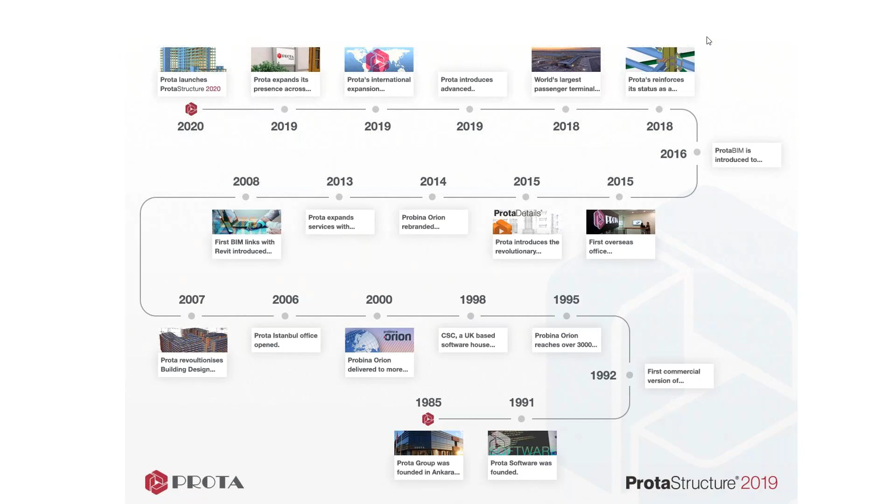And what we want to emphasize over here is that the Prota Group is not just a software development group, but it also has a very strong background in engineering projects. So we're not just developing software without really using the software ourselves. And so being a first-hand user, we know exactly what is needed by the engineers, and so that's what we produce.

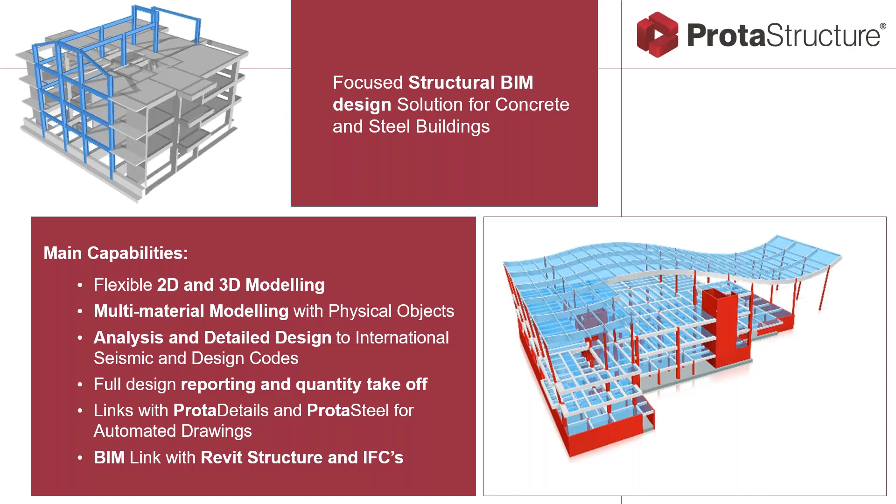So you don't need to go to separate programs to model your concrete and then a different program to model your steel. It's all done within ProtaStructure, and it's a full analysis and detailed design package, full design reporting and quantity takeoff. It has links to Prota Details and ProtaSteel. ProtaSteel is the software which we will be talking about today, and then BIM links with Revit Structure and IFCs.

So that's ProtaStructure. And the main benefits, why would you use ProtaStructure? It's the ease of use and maximum productivity. I mean, obviously, in the times we're living in, there's a glut of software, and every software claims to do everything, and they do most of the time.

But the question is, how do they do it? How much time do you need to spend to get a certain thing done? And if the difference between one software and another is a lot, then obviously that's what makes the difference, because this is man hours. So our main emphasis is on maximum productivity and ease of use. That's what makes it a much better product than its competitors.

ProtaSteel is, like I said, what we'll be talking about today. It's automated connection design and steel detailing of your projects. It's totally integrated with ProtaStructure. We'll be talking about some of the main features like Intelli-Connect, some of the design reports and the wide range of connections, etc. Obviously, in a seminar like this, it's impossible to go over all the features. All we want to do is get you excited about the main capabilities of the program, so that you can see what you can do with it and take it from there.

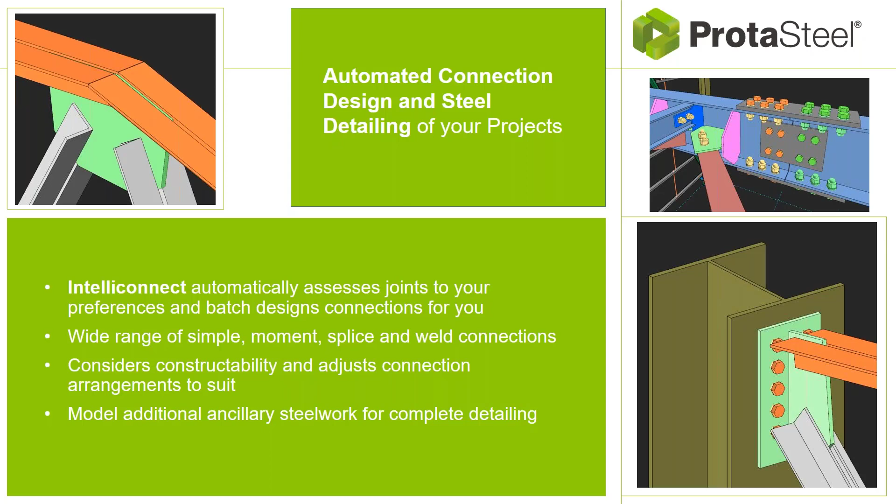So ProtaSteel, today's webinar, what do we mean by connection design and steelwork detailing? What we mean is the full transfer of your ProtaStructure model to ProtaSteel, including all your analysis results. So once you're done with the model, you will not have to remodel the structure in ProtaSteel again. You will just transfer the model, including the analysis results, into ProtaSteel and start doing the detailing. It's integrated intelligent connection design using a comprehensive range of flexible connection macros. We'll be talking about those in a minute.

Automated steel connection design using our revolutionary Intelli-Connect to instantly create constructable arrangements. We'll be talking a lot about this. You'll see it's a fascinating feature. It's one of the features which no other software has at the moment.

Full connection design reporting with step-by-step calculation documentation. We'll be talking about this as well, and you will see that this is a feature which is normally a separate program. None of the programs offering this kind of capability offer full connection design reporting built into the program itself. Usually these programs are sold separately. I'll be talking about that part, but what you need to know is that it's entirely integrated, and there's a lot in it.

Creation of complete steel detail drawings to quickly deliver your projects. These are for the consultancy companies who need to prepare the connection drawings, local details of particular points which are important to pass over to those who are going to produce the shop drawings. We'll be going over those as well. And finally, extending your steel detailing capabilities down to shop drawing production, assembly details, and even full cutting lists. This is for the full-blown user who wants to actually produce shop drawings for the fabricators. So there's a lot to cover, and hopefully we'll go through the main features. So let's see it in action.

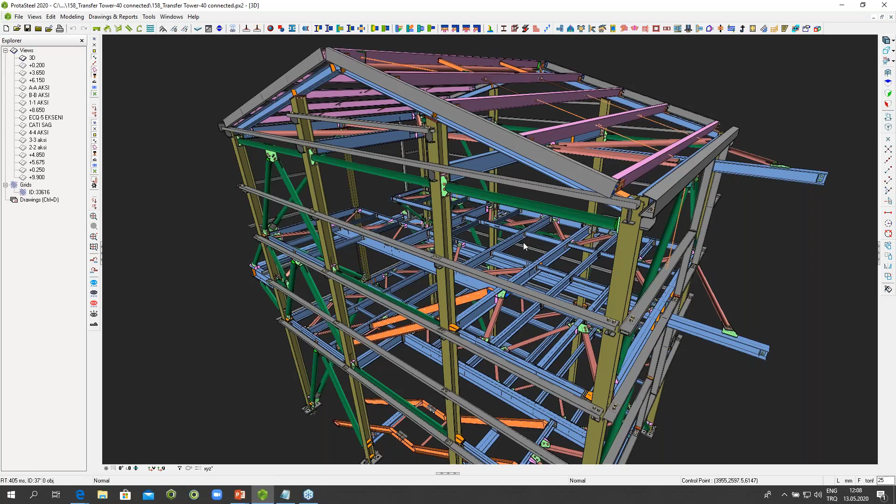So like I said, what is ProtaSteel? ProtaSteel is a steel detailing solution. As you can see on the screen, you have a little view of a detailed model, and I can zoom in to see what it is like. All the bolts, all the plates, all the welds, all the elements, all the cuts have been modeled directly in. So the purpose of the program is to leave nothing unmodeled, to take the model from ProtaStructure to ProtaSteel, and then model all the connections in ProtaSteel.

And then once you have the model connected, you can create your shop drawings from there. You can create your connection drawings from there. You can take material takeoffs, etc. So that's what we'll be talking about today. So let me begin by opening the model on which I'm going to show you most of the features.

Okay, so the program is all about detailing. The program is all about connecting. So obviously we need connection macros. We need fast methods to connect the steel. So let's begin with some of the simpler connections. We've got a range of connections over here, you can see on the top of the screen. These are all the connections which are available.

And don't be misled into thinking that there are not so many, because in ProtaSteel, most of these connections are multi-faceted, and they can handle multiple situations, as I'll show you in a minute. For example, if I were to talk about the purlin connection, you can see there are different types of connections which are all built into the same connection.

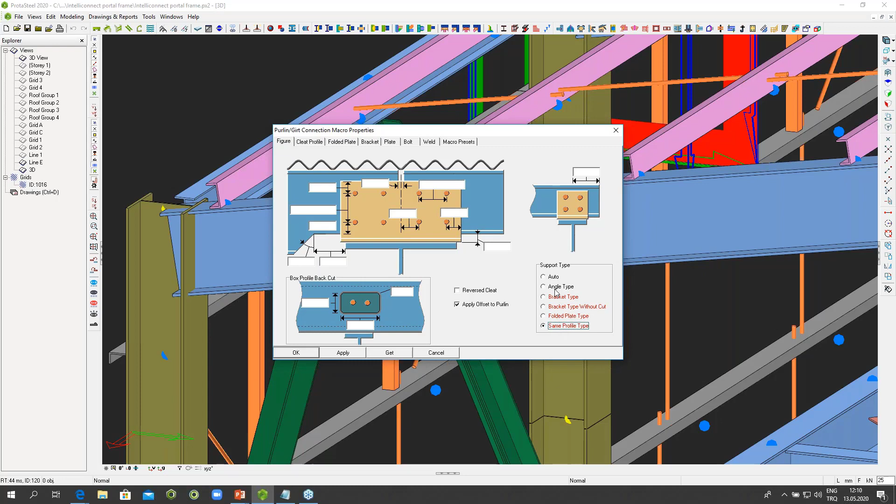So I'm going to choose the angle type with the reverse cleat over here right now. And I'm just going to show you. All you need to do is just pick the main beam and pick the purlin, and there you have the connection. It's as simple as that. There's nothing else you need to do, basically click the elements which are related, and there you go. Your connection is ready. It's as simple as that.

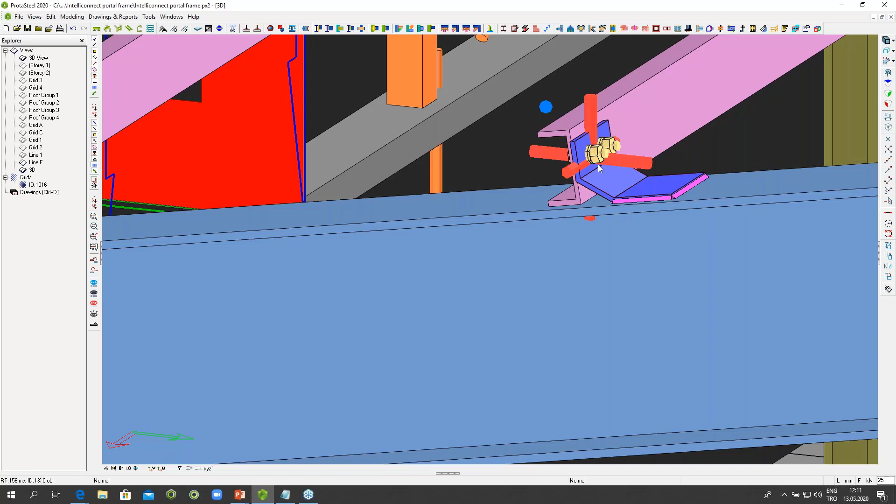And as you can see, as I just showed you a while ago, the options you have are many. You can change the type of the connection right from within the macro. You can go to a completely different connection, and normally programs would have all these features as different icons. So all these, the angle type, the bracket type without cut, the folded plate type, all these would be different icons, but that'll just create a clutter on the screen. But over here, what we have is you can just connect it as you go.

I'm going to talk about over here on the left. Let me just go over the list of macros first. So you have beam to beam connections. You have beam to column connections. You have the stiffened end plate connection. You have the beam to beam connection. You have a fin plate connection. You have the angle cleat connection. This is for the fixed beam. You have the beam to column stiffened end plate connections, beam to column end plate connections.

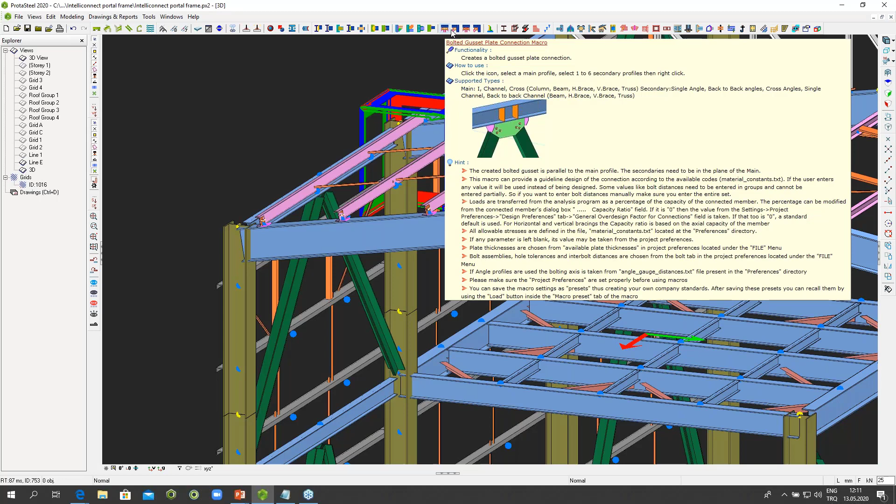You have the moment connections over there, the haunch connection, the directly welded connections, the flange plate moment connection, which is very commonly used, and you have the extended end plate connection, and then you have all your bracing connections for the vertical braces and the horizontal braces and the trusses, and you have the welded gusset connections and the welded corner gusset connections. Then you have connections for the purlins and the splices, and there's a whole lot which we can talk about, but let me just quickly take you through some of them over here.

So for example, if we were talking about the girt connection over here, let me go back to this particular connection and change the type and use the bracket type without cut, which is more appropriate for the girts, and just show the column, show this girt, show the other girt, and that's it. Reverse this. I don't want to make it hang from the top, so I'll use the reverse cleat option, and there you go. So as you can see, with a few clicks, I'm able to model my connection.

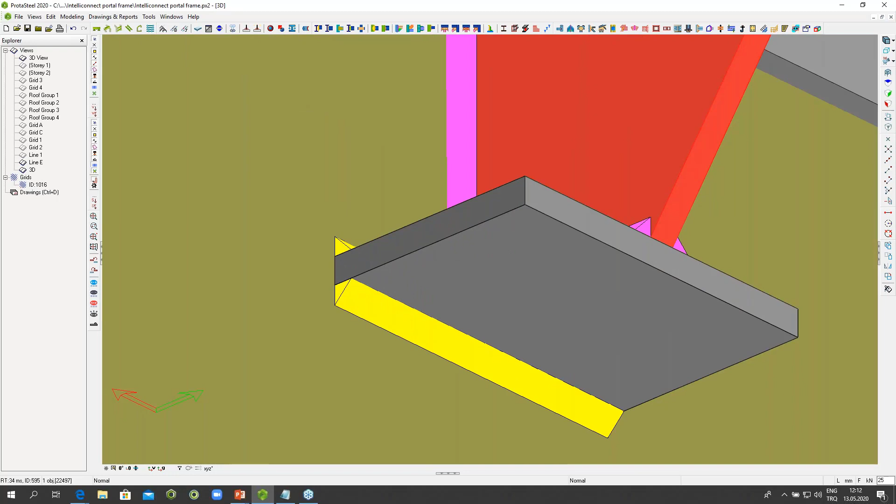Previously, we didn't have the welds in 3D. As you can see now, we have the welds in 3D, so it's easier to see your welds, and that makes it a lot easier to visualize them. In a similar way, you can continue connecting. For example, this point over here can also be connected with the same one. So whether there are two girts coming in or a single girt coming in, the same macro will be used to model it.

Now let's go over the splice. Obviously, every model is going to have areas which you will need to splice. So let's just go over that. Just by a few clicks, you are able to splice the connection. Let's go over some other columns. It's as easy as clicking. And I'm going to show you an even easier way in a while, but for the moment, you can see on the screen that it's extremely easy to connect.

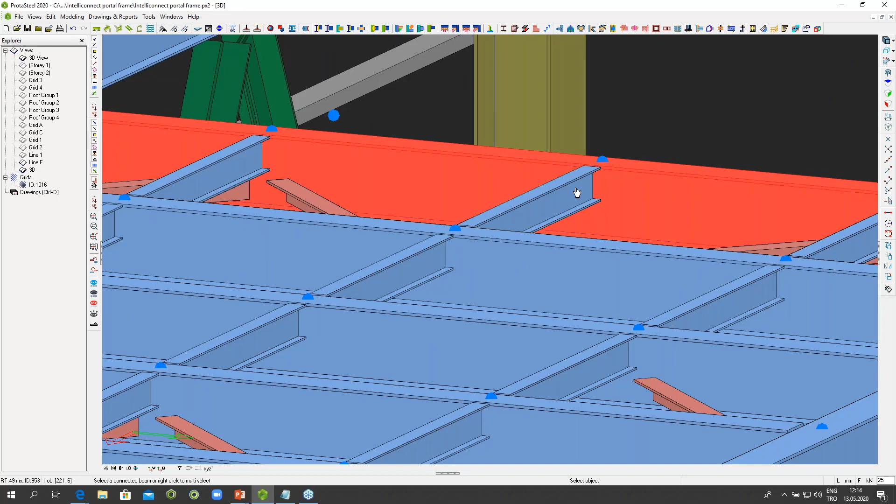Now, let's talk a bit about the floor. It's one of the major parts of the connections. We have large floors in our buildings, and these floors can be connected in different ways. We have different options. For example, we can have a stiffened end plate connection. So I can just go and connect this main beam and this secondary beam, and there we have a stiffened end plate connection. It's a very commonly used connection. It's one of the best connections as far as ease of erection is concerned. It's slightly eccentric, but it's also very useful for other reasons.

Then we have the beam-to-beam end plate connection. So for example, if we have this beam and this beam, we can have an end plate connection, which is different from a stiffened end plate. Or what we can do is we can have a fin plate connection. We can have a connection like this. So all these are options which we can use in our floors, and obviously all of them have their own merits, and depending on what we want to do, we can use them very easily. What I want to say over here is that all these connections are being designed as we go.

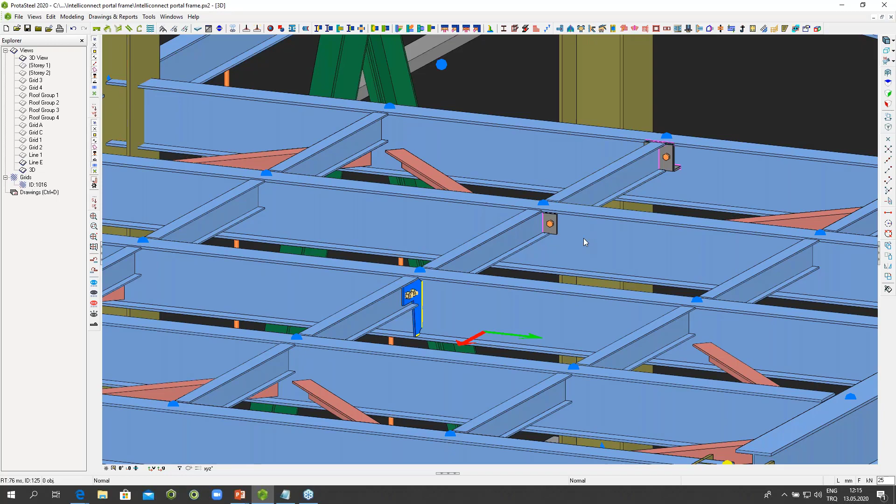So that's one of the most important features which we'll be talking about in a while, but I just want to emphasize that as we go along, normally the biggest amount of time which we lose, for example, when we are connecting, is that all these macros have a lot of input, and all these numbers have to be inputted theoretically, and that's a lot of input. I mean, anybody with not too much experience in the field of steel will find this pretty overwhelming to enter that much information to get a properly designed connection.

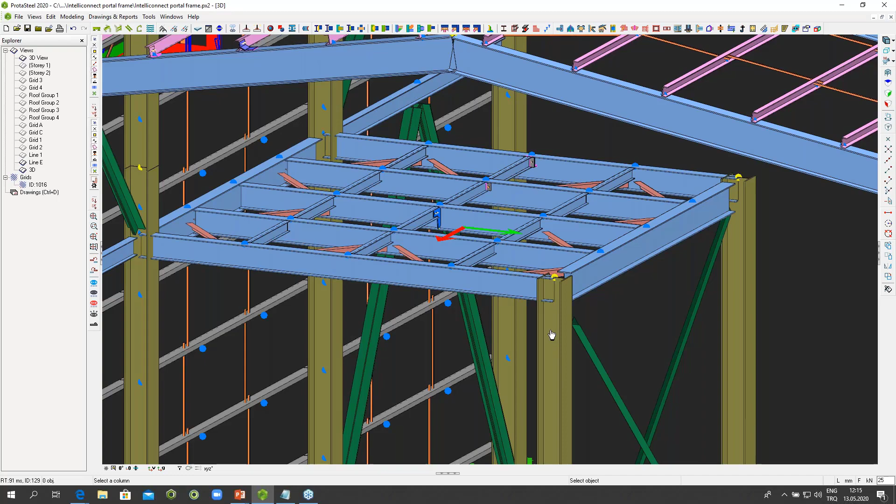But with ProtaSteel, the advantage which you will not find in other softwares is that these connections are being designed according to the loads which have been transferred from ProtaStructure. So, for example, I'll do a little complicated example over here. Let's go and connect this column with this beam, and this is a haunch connection, and it's got the top stiffener and the bottom stiffener, but I want the middle stiffener as well. So I just go inside and I go to my figure and I add the middle stiffener. So now I have the middle stiffener as well.

Now I go on the other side, and on the other side I have another beam coming in, and this beam needs to be connected. But now these two stiffeners are creating a problem. They're getting in the way of the connection. So I'll show you a feature which is very useful. I just select the column, select the beam, and I say that I want to use these existing stiffeners from the other connection as part of my connection, and there you go.

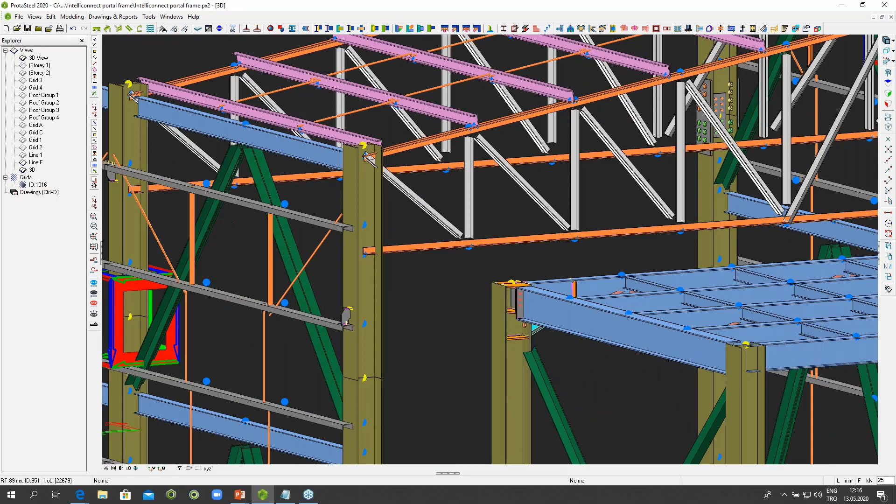So what you're seeing is a very complicated joint with a haunch on one side and a stiffened end plate connection on the other side, which have worked together, as you can see on the screen. And with a few clicks, we've been able to connect them. So I showed you the floor beams, the haunch connection, the connection from the other side. I can show you how the fin plate is connected, how the stiffened end plate is connected.

Let's do a bit of the bracings. For example, these are the vertical bracings. All you need to do is just show the beam and show this vertical bracing, and there you go. Your connection is done. Let's do a bit of the trusses, for example. Let's go over the trusses. So for the trusses, all I need to do is choose a welded gusset connection, and I need to choose the bottom chord. These are the secondary elements, and my truss is connected.

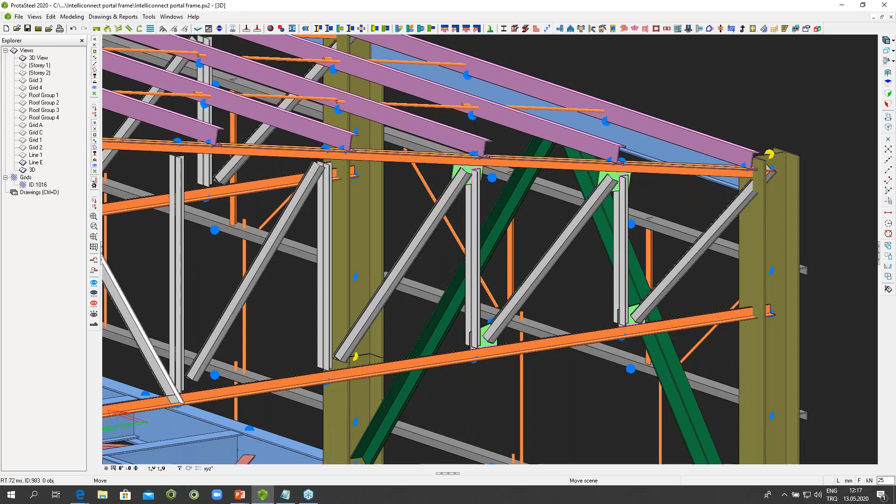This one is connected as well. This is connected as well. As you can see, I'm just clicking on the elements, and the connections are being made. What about over here or over here? If I come to this point, what I can do is I can quickly use this macro over here and connect the truss. So very quickly, as you can see on the screen, I can go about making my connections.

Let's do a bit of base plates. So for example, this is one feature I want to talk about quickly and then move on. Let's do a base plate, and it's the same macro as you will see, but there's a difference between this column and this column. And the difference is that this column has a fixed base. As you can see, all the releases have been fixed, whereas this column has a hinge. So the rotations are allowed.

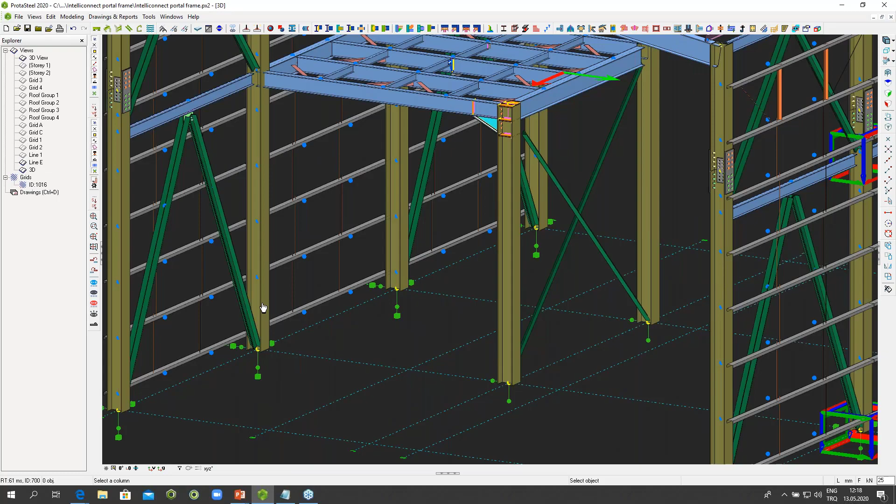The program will automatically detect this, and while I'm using the base plate on this column, it's going to produce a fixed connection. But when I use the same macro on the hinged column, it's going to produce the hinge connection depending on the end conditions of the column. So these kinds of presets, which I'm not going to be talking much about today because we don't have much time, but what you can do with ProtaSteel is you can actually create company presets for all different types of profiles, and then basically just start clicking away with these intelligent macros.

Because you'll have the company presets in the background. They will be intelligent. They will realize which profile you're talking about. They'll realize what structural condition exists, and they'll know the loads. And all you will need to do is just point and shoot. The other programs, if you actually sit down and compare, what you will see is that the majority of your time is spent on entering the data. This is no exaggeration. The majority of the time is spent on all these numbers on the screen. There's so much to input for each and every connection.

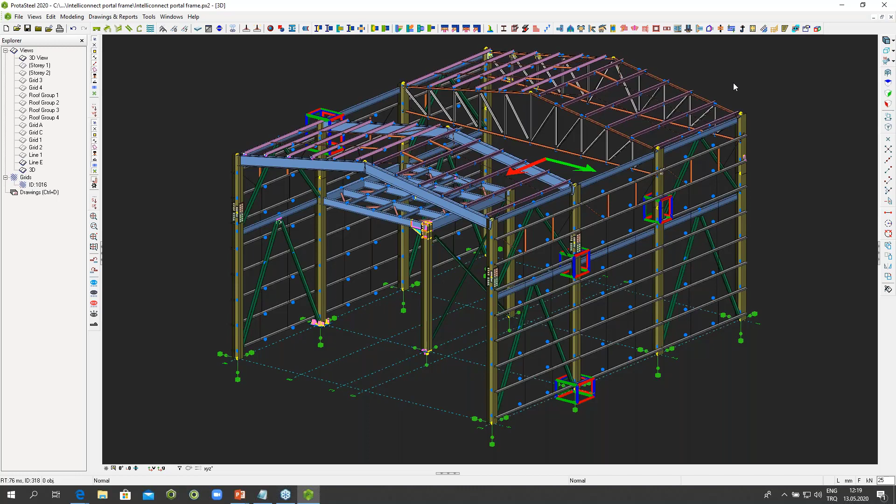So normally, even if you were well experienced, you would spend about 5 to 10 minutes entering a single connection. But once you have the loads from ProtaStructure, once you have the company standards set up, and once you have the company presets set up, it becomes extremely easy to make these connections. And of course, it's not just structural connections. Okay, let me just continue with this a bit.

So we had a base plate over here, and what you can do is you can add the anchor bolts, for example. So you can select this base plate, and you can add anchor bolts to that, and then you can double click on the anchor bolt and say I want a different angle on that, and you can turn it to whichever direction you want, and very easily you have your anchor bolts fit in.

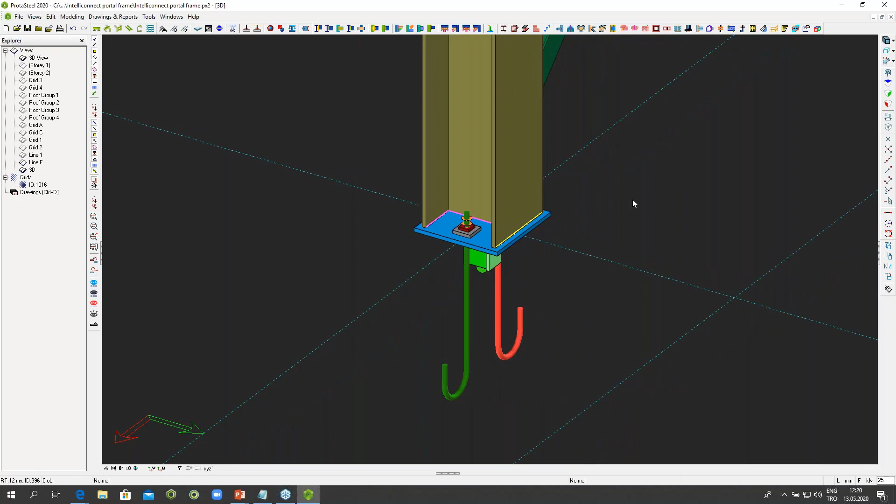Obviously, this is not the only type which is supported. You can have different types of anchor bolts, the J type, the simple type, and there's a background file which you can change to modify the different types. So those are very easy. And let me come back to the non-structural connections for a bit now, so that you can see the wide variety of things that I'm talking about.

But before I do that, let me quickly do this. So let's say we have a floor which has a concrete top on it. So we can add the studs extremely easily, as you can see. Very easily, I'm just going to add the studs. So it was as simple as that.

Now let me go ahead and add some handrails, just to give you an idea. Let me just add a handrail over there. Let me just add a handrail over here, and let me add a handrail on that beam. And once the handrails are added, you might think they're connected to each other, but they're at a distance. They shouldn't be like this.

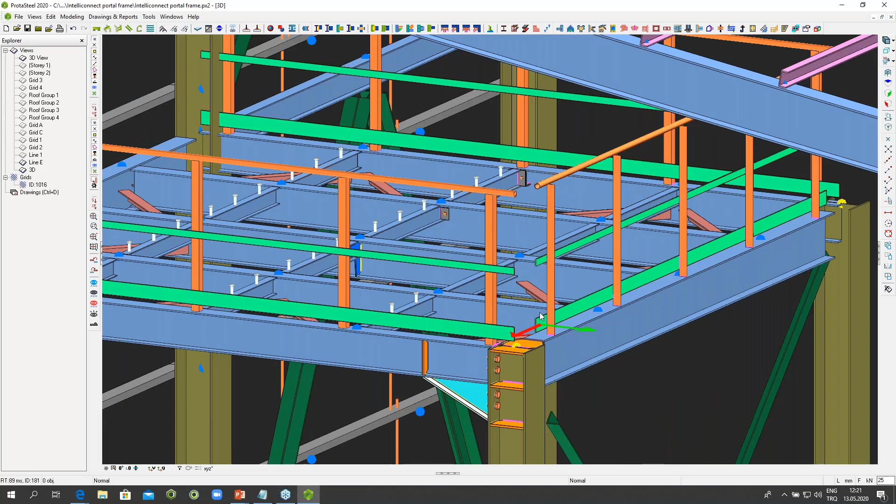So we have something where you just show that this handrail needs to be connected to this handrail, and there you go. Even the pipes are connected. The bottom, the toe plate and the knee plate, they're all connected. Let's join these two as well. I need to go to the other side to see it better.

Yeah, just go to the other side and go to my connection. And I say this handrail needs to be connected to this handrail. And there you go. So the knee rails, the knee plates, and the toe plates are all connected. So as you can see, it's not just structural connections, it's the non-structural connections as well, which can easily be modeled.

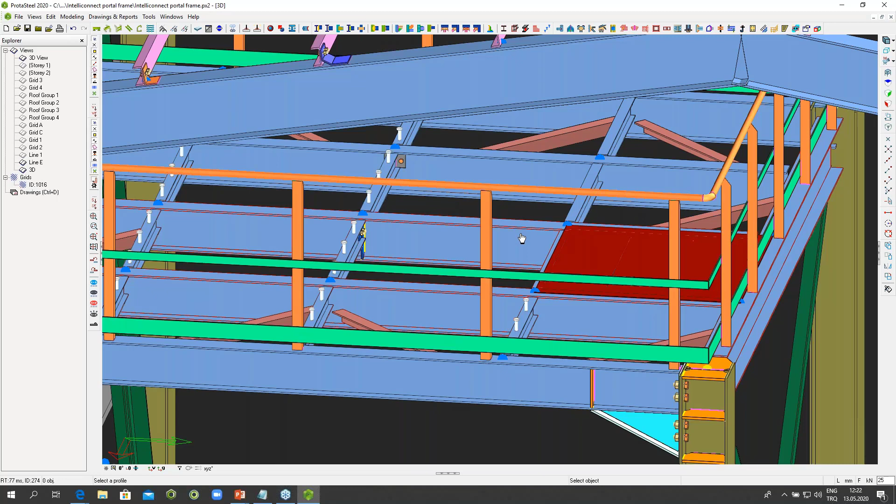What about if we had some checkered plate on this? So if I were to have a checkered plate on this, for example, if I were to select this beam, this beam, this beam, and this beam, and right click, I can immediately produce a checkered plate flooring, and that's as simple as that. I can go on and copy them around as well. So what I want to emphasize over here, not wanting to take too much time, is that these connections are extremely easy to use, and they shouldn't overwhelm you at all.

Now I want to move on to the next feature, which is the connection reports. So let me just open this model again so that I can take you through that. So what is the need? Where is the need for that? Obviously, all the consultancy companies want to connect their models, but they also want to produce the connection reports, the connection design reports, for the client for approvals.

And normally, I talked about this in the beginning as well, this takes a lot of time, and not only is it very time consuming, you have to use dedicated software for this, and those are not cheap. You have to spend thousands of dollars for each license just to get this feature of being able to produce the connection reports. Now, let me just show you, for example, over here.

Let me do a quick haunch connection over here, and let me connect this column to this beam. And what I want to show you is that there's a color coding scheme which I want to open right now. It's over here under the views menu. When you open it, everything turns white, except for the connections which have been checked.

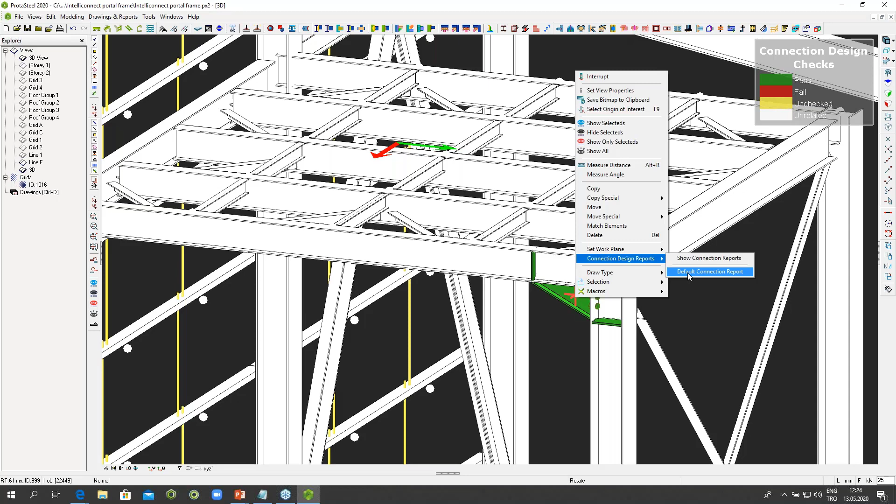And if the connection is green, what it means is that everything worked. Nothing has failed. And if the connection is not green, if it is red, that would mean that something inside the connection has failed, whether it's a bolt or a plate or a weld or whatever. But then you have to go inside the report and see. So let's go inside this report. All you need to do is select the macro and say, I want to see the default connection report in this case.

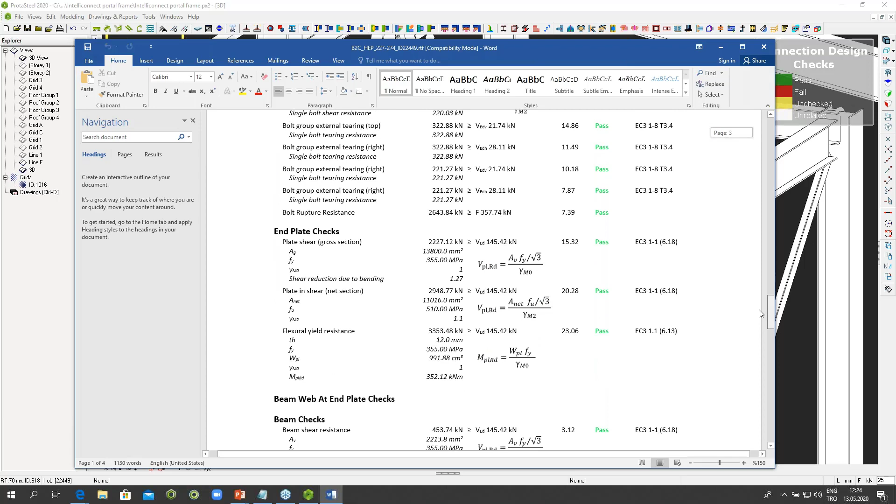And the report is ready in the background. And as you can see, this is a full-fledged report with a picture on top. It gives all the input information in the beginning, and then it starts the checks, the geometric checks in the beginning, and then actually the stress checks, and they're all passing. Nothing has failed. Green color means everything has passed. If you see something red, then something has failed. So let's make something fail.

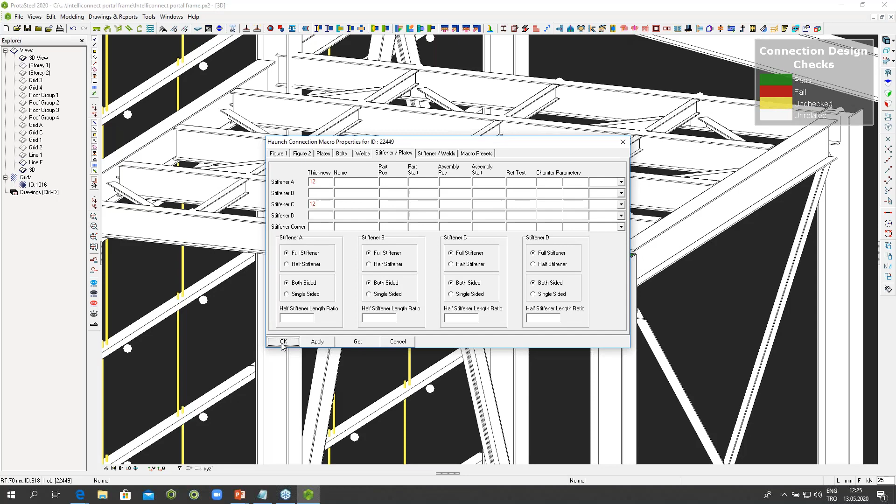For example, if I were to reduce the thickness of this, maybe that will make it red. Yeah, okay, so I reduced the thickness of the stiffener, and there's a buckling of the stiffener going on because of the heavy moment loads. And let me report now. And now when we go through the report again, we see that a lot of it is still green, but we have something failing. The intermediate stiffener has failed, and it hasn't failed by much, but it's failed.

So as you can see, it's extremely useful to just use this feature as it is, and you can visually see immediately whether the connection is green or red. You don't need to worry about the green ones. You just keep on clicking and making your connections. Whenever you see something red, you stop. And what I can tell you is that in most of the cases, if it is red, it'll be a very minor thing, because in the background we are doing a basic guideline design to begin with. So most of the major checks are usually completed before you do it.

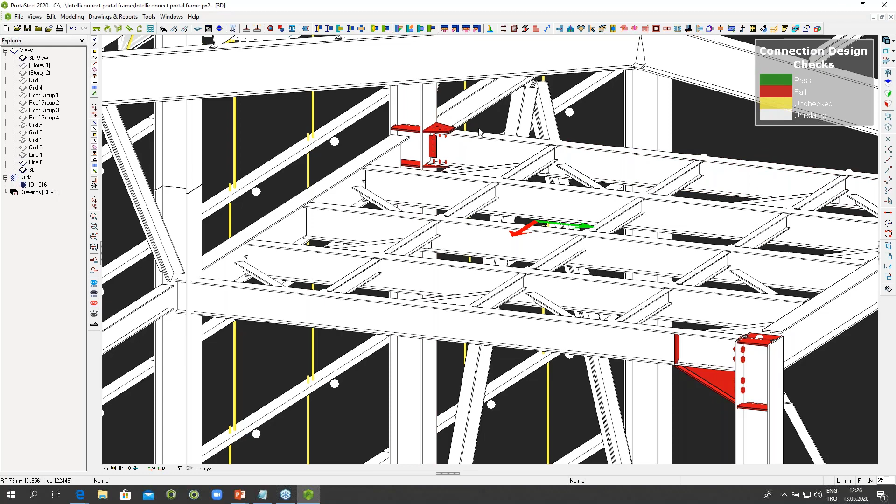So even when you see something, let me just show you a flange plate moment connection over here. Let's see if this is the one. Yeah, so let's connect this column with this beam. Yes, so that's coming out red. And let's go on the other side and see what the problem is. There we go. And once again, you will see that the major checks will all be passed, and there could be some minor failures with the stiffener sometimes. And all these can be bypassed by the company standards. By the way, you can input your company standards, and they will help you. So you see some stiffeners failing at the end.

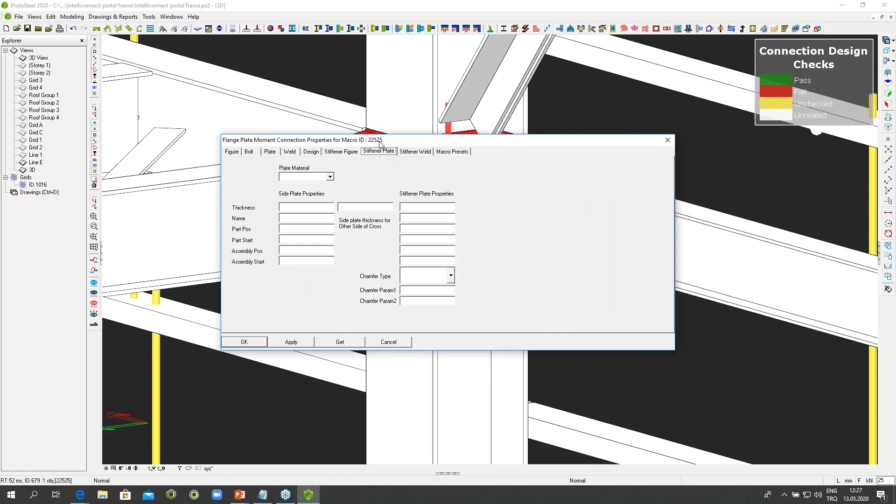So obviously this has a pretty simple solution in all probability. Let me just go to that. Go back to the macro. And I think it could be this one. I'm not sure, but let's see. Yeah, so I increased the stiffener size, and now everything is green again. So this feature is incredibly powerful.

I did another one for the stiffened end plate, and I deliberately increased the load extremely high so that it would fail, just to show you what will happen. So I'm going to connect this with this. It's red because the load is extremely high. I've just made it extremely high. And I know in this case it's the bolt which is failing. The bolt stresses are very high. So let me show you that in a minute as well.

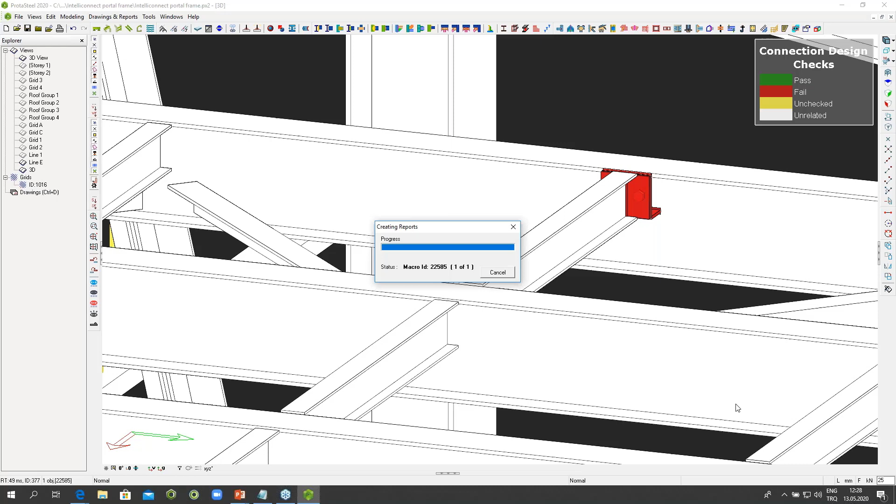Yeah, let's quickly go through this. And yeah, there you see shear resistance is causing the problem. So what I'm going to do is, I know this is an M16 bolt. I'm going to change it to an M20 bolt. So I'm going to go to the bolt assembly, and I'm going to change the diameter of the bolt to a 20mm bolt. And there you go. So it's as simple as that.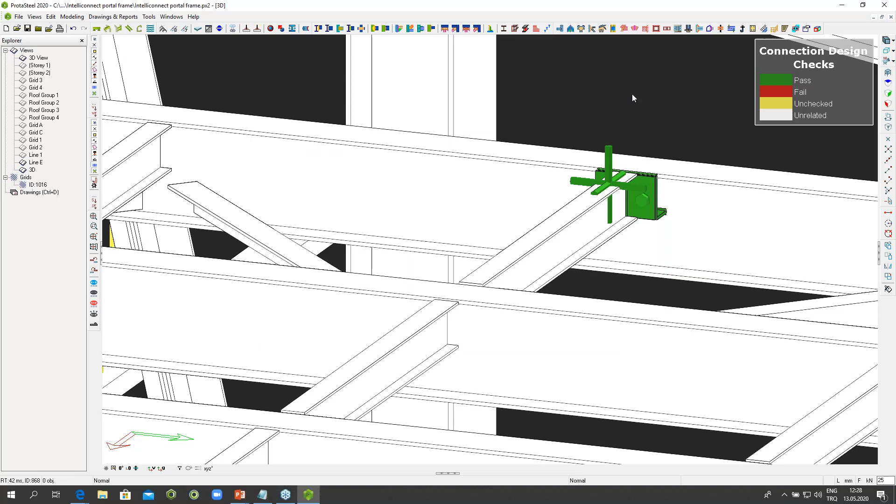You just make the few changes which are required. You either change the bolt size, or change the plate thickness, or change the weld size whenever needed. And like I said, in 99% of the cases, they will be avoided because it's already doing the design according to the loads and your company standards. I deliberately made a few things fail over here just to show you what it looks like, so that the whole thing becomes clear.

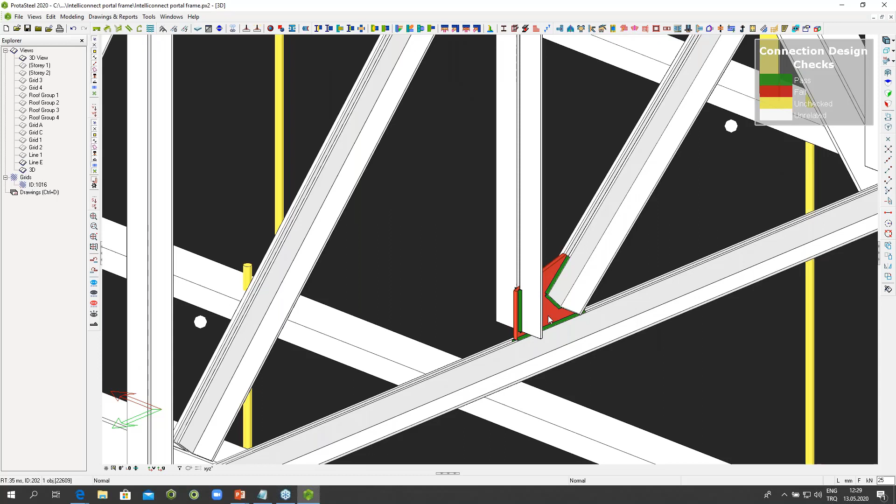Now, what we have the reports for right now is all your floor beam connections, all your column beam connections, whether they are simple connections, whether they are moment connections, they're all covered. And not only that, we also have, if we were to connect this truss over here, this is the bracing connection, and over here also we can just open the report quickly and see that the bracing connection has a full report attached to it.

There you go. This is a very exciting feature. I wanted to go into it in some detail. Obviously, we don't have much time, but what I want to reiterate at this point is this feature is sold separately for thousands of dollars, which you're going to get as a part of your ProtaSteel, and this is going to make your work extremely easy.

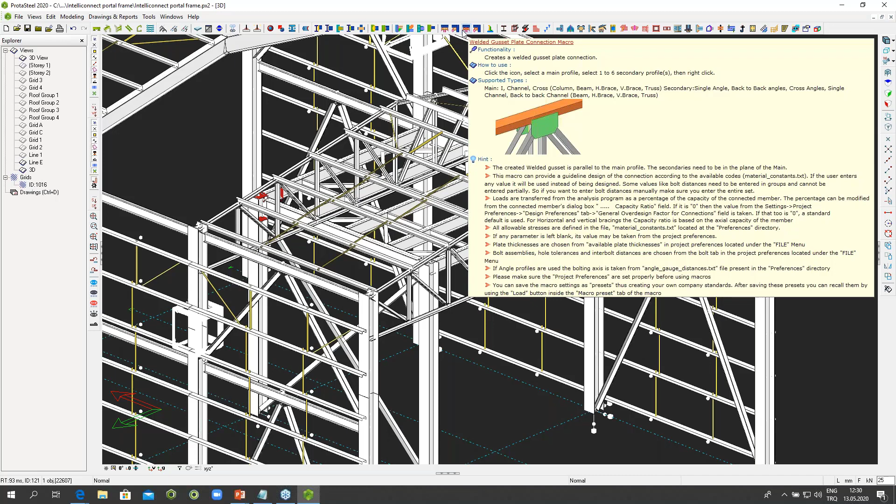So let me just summarize: we have all your bracing connections, your bolted bracing connections, your welded bracing connections, column moment connections, column simple connections, floor beam connections. All of them have their reports ready at this point in time. Your sag rod reports or your purlin and girt reports will be coming in down the line as well. But all the major connections, like your base plates, floor beams, simple column to beam connections, moment connections, splices.

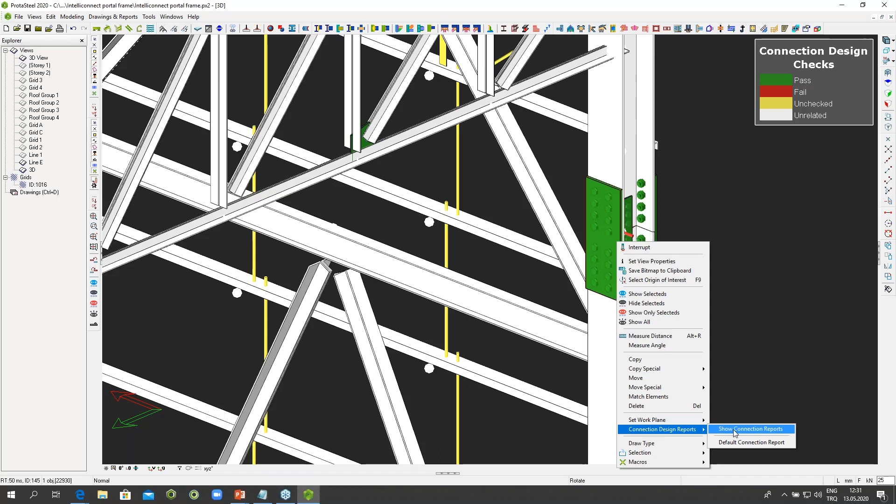So let me just do a quick splice over here. Sorry. There you go. That's a green splice, and you can go inside and you can see the report as well. All these are available on the fly, and this will basically save you a lot of time and a lot of money.

As you can see, all your tests, all your geometric tests are there. It's a beautiful report. You can just print them out all together in one go at the end. You will have your entire analysis regarding these connections done. Now, I want to move on because we don't have much time.

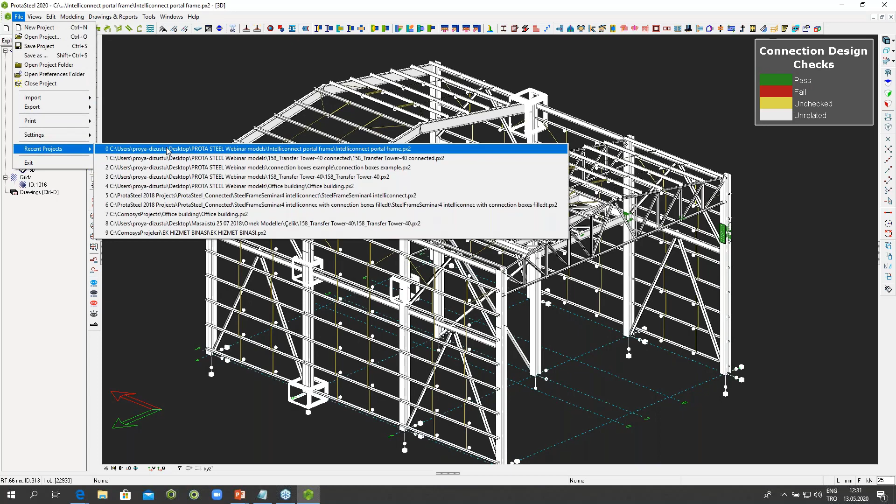I want to move on to a very exciting feature, which is what we call Intelli-Connect. Let me just go to this. Yeah, there we go. So Intelli-Connect is a feature, like I told you how easy it was to connect the steel, make the connections. It's as simple as point and shoot. You have the loads, you have the company presets, you just pick the elements and there you go. But some of you might think, well, even that takes a lot of time in a building like this. It's going to take me probably a day or two to go over all the connections one by one.

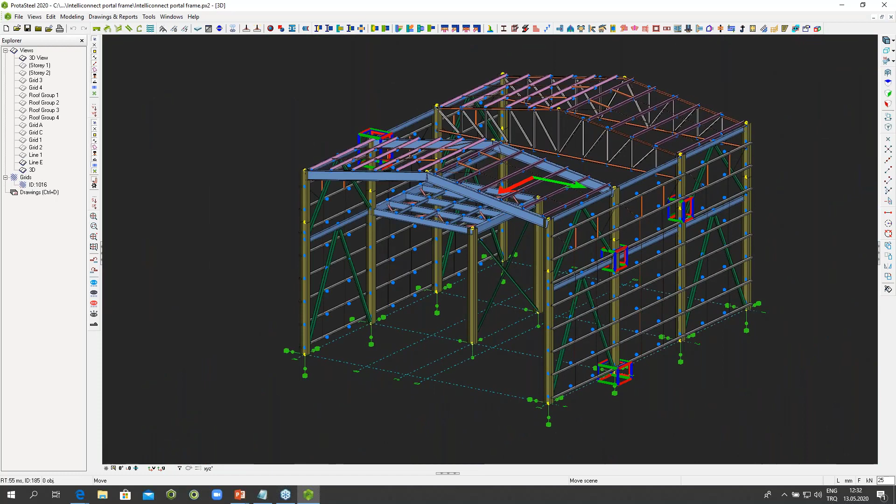So what I want to show you now is a revolutionary technology, which we call Intelli-Connect. What it does is it works on a node by node case. It'll look at this node, analyze it, and see what it looks like. It's got a connection coming in from here, a connection coming in from that side. It's going to look at this node over here and say it's got a fixed connection coming in, two simple connections coming in from those sides, a vertical brace coming in, and it'll try to decide what a good engineering solution can be for those points, and it's going to make that solution for you.

Some of the cases are very simple, like the purlins and the girts. But some of the things are extremely complicated, like a place where you have a column, beams coming in from all sides, vertical braces. This is a place where you have 8 different connections going in. And if you use some of the features available in other programs, usually called Auto-Connect or something, you will see everything clashing with everything, because the haunch plates will be clashing with the stiffened end plates, and the bracing will be clashing with this. You'll basically have to delete it and do it all over again.

So we're going to take you through this revolutionary technology, which is called Intelli-Connect, and show you how it works. How it works is extremely simple. All you do is you select all the building. Well, obviously you don't have to do that. You can do it partially as well.

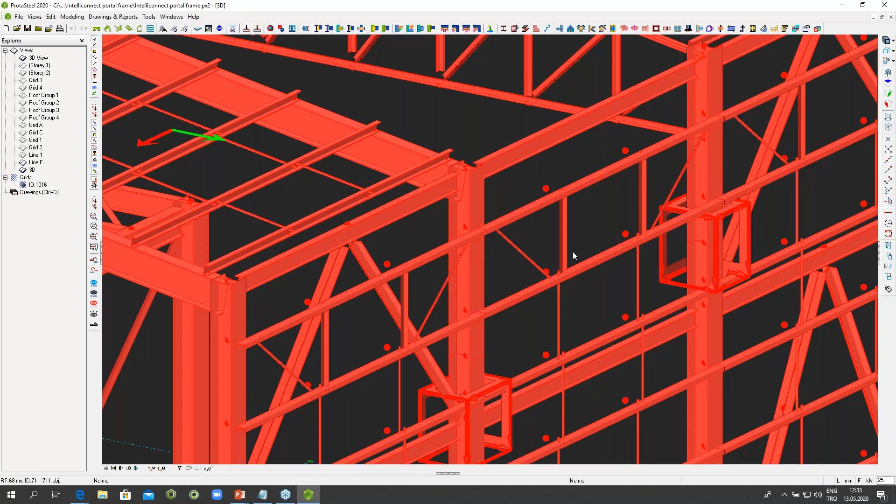But you select the building, and you make sure you select the nodes as well, because like I said, these little dots, those are the finite element nodes, because it works on a node by node basis. So you make sure the nodes are visible, and then you select them. And once you select them, all you need to do is right click and go to the Intelli-Connect menu.

And once you go to the Intelli-Connect menu, let's say you want to connect all the purlins. Now there are maybe about 30-40 different purlins, and some of you might be thinking that's going to take me an hour to connect. So just go to the purlin connections, and you have all the different features. Now over here, you don't even have to learn how the macro works. Let's say you prefer the angle type, the cleat in this direction, but you want to reverse the cleat so that it looks like this, and you want to connect all the purlins.

So all you do is, there's another feature here which is for the end purlins. You can extend them if you want. I'm not going to extend them right now, but you can. But you just say run, and now it's going through the model. It's checking each node, and it's trying to find out which nodes have purlins on them. And then it's selectively taking those nodes, using the purlin connections with the particular settings which you gave it, and it gives you a list of what it managed to do.

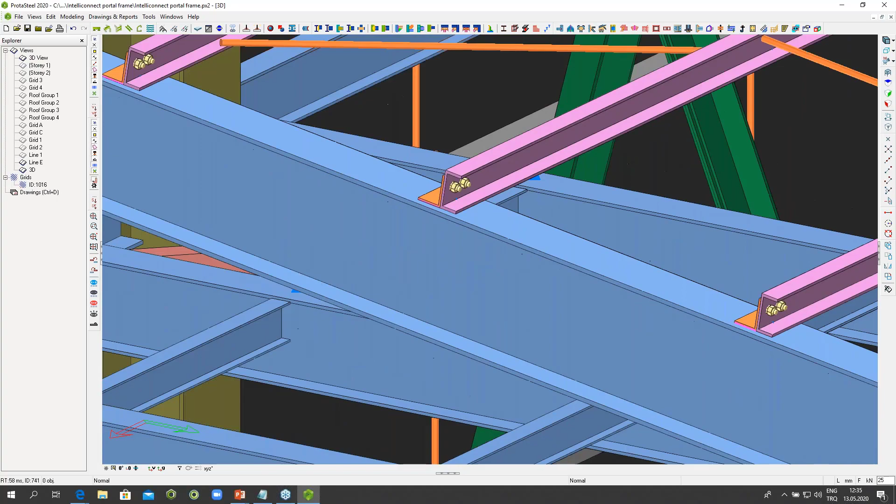Now, in some cases, it will not be able to perfectly finish the job. But over here it says, look, I found node number 2583. I was able to connect it. I found node number 2584. I was able to connect it. So basically, just quickly go through this, and if you see something which is not done, you can modify that by hand later. But let's go and see what it's done. So you can see very quickly that all the purlins connected, and exactly the way we wanted them to be connected.

Now I want a different connection for the girts. So let me just select the whole thing, right click, Intelli-Connect, and go for the girt connections. But this time I don't want the angle cleat, because the angle cleat, you need very large angles for this. I want to prefer this bracket type without cut, and I just want to go with that. So I just say run, and now it's going through the whole building, finding the girts wherever they are, whether they're single-sided or double-sided.

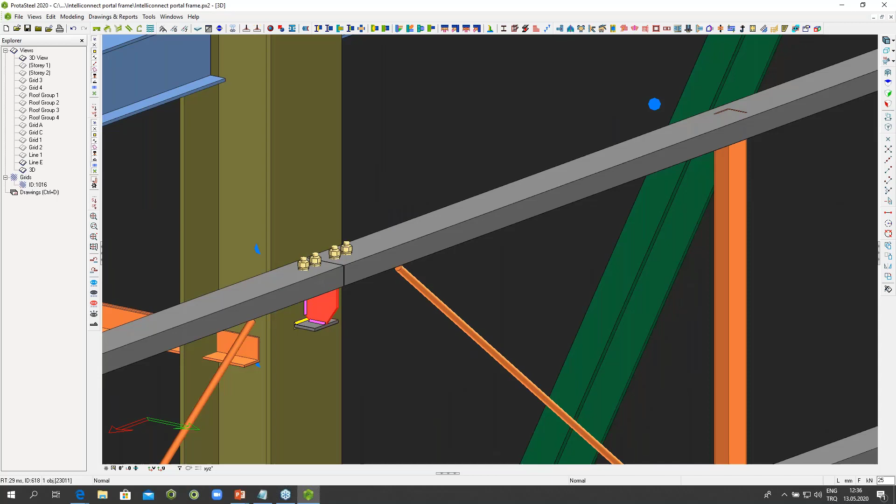It's going to decide itself, and let me go through this quickly again. So everything is hopefully done. Yeah. So the single-sided ones have been connected with a single click, and the double-sided ones have also been connected. So not only does it pick up the node, it also picks up the configuration of the node. Let me just continue. I mean, this is extremely powerful. This is very useful. It really reduces the work for somebody who's afraid of 3D steel modeling.

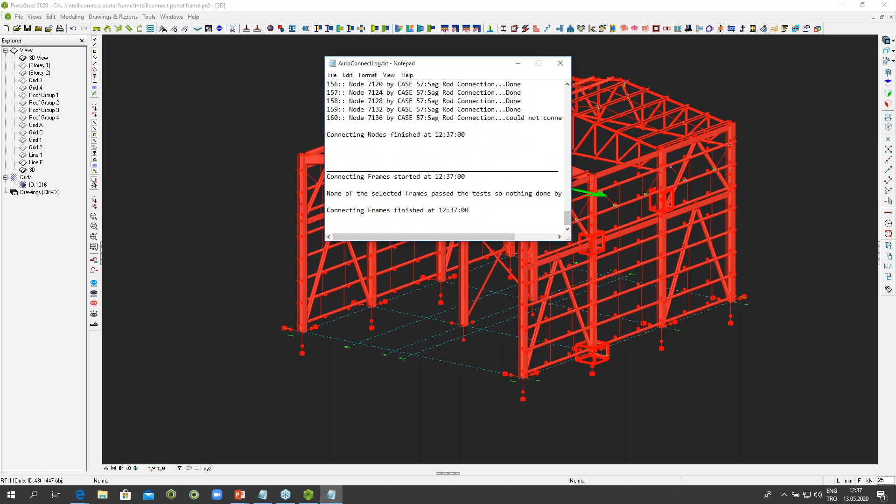Let me choose the whole building again, and let's say I want to connect the sag rods. The sag rods are quite a headache, as most of you will know if you've ever done steel detailing. But let me just go through, and this time, because there's a standard procedure for those, it just starts the connection. Okay, so we're good, hopefully. There are some of them which were not connected, which I'll talk about in a minute.

But look at these. All the holes in the girts have been made. Wherever the sag rod is passing, there's a hole in the girt, and whenever we have a different type of connection, that has also been connected. Only these ones have not been connected, which then need to be done manually, because they're a different type which was not available to the Intelli-Connect feature at this point.

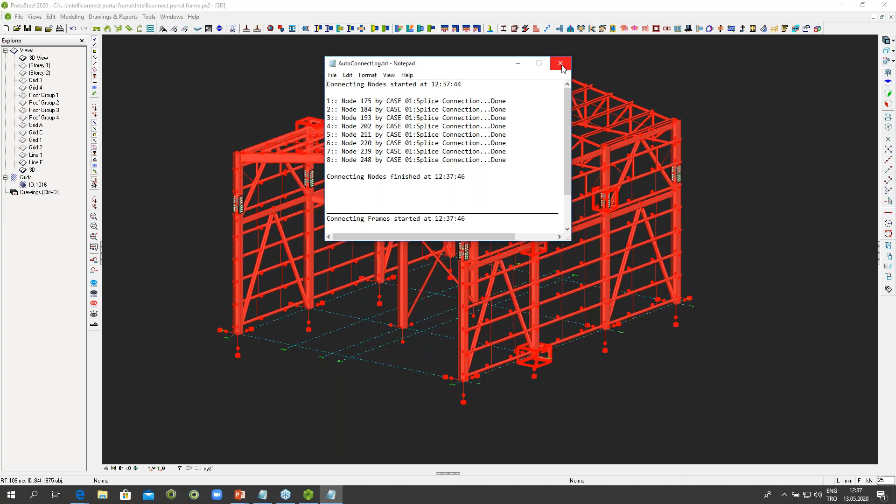Next, let's select the whole building again and do a right click, go to the Intelli-Connect menu, and say I want to do the splice connections. Now there are not many splices over here, but let's just start that, and immediately you can see on the screen it's finding all the places. It's going through the nodes and saying, okay, this is a splice location. The two elements are coming in, and they're parallel to each other, and they're columns or beams or whatever, and they're aligned as well. So this is a splice location, and it's just gone in and done the splices for you in a second. So that's extremely powerful.

Let's select the whole building again, and go to the Intelli-Connect menu, and do the truss connections, for example. The truss connections usually take quite a lot of time, so let me just go through those quickly. In the background, you can see what it's doing.

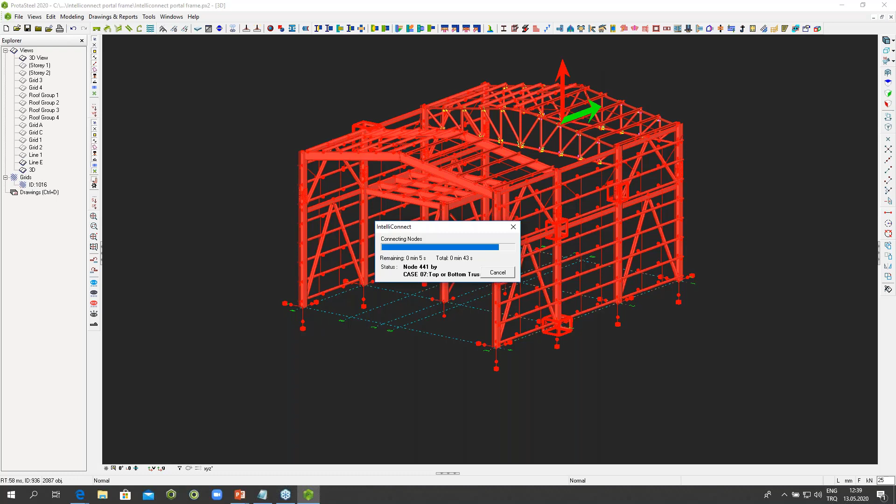This is taking a bit longer. And the reason why they're taking a bit longer than usual, and by usual I mean from the previous releases, is that at this point they're also creating the design reports in the background, which you can then access later on. So some of you who have been using the program might notice a slight reduction in speed over here, but that's because of the production of design reports in the background.

So here again, we see the connections over here, which have been made. And let's just flip the building around and see. There you go. It's chosen the welded connection over the bolted connection, depending on certain parameters, which I don't want to go into right now. You can customize that. Obviously, trusses are connected with a welded gusset, not with a bolted gusset. That's very customizable. But it was so easy. I just selected the whole building and just pressed. Now I want to do something else.

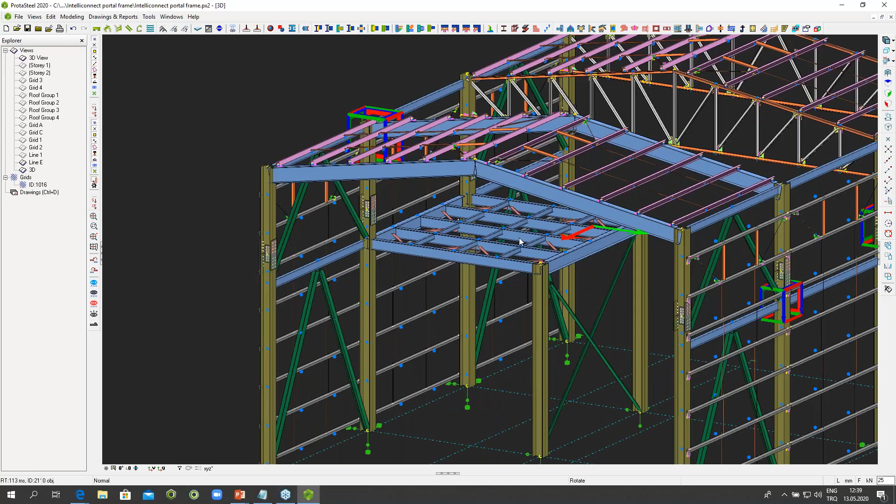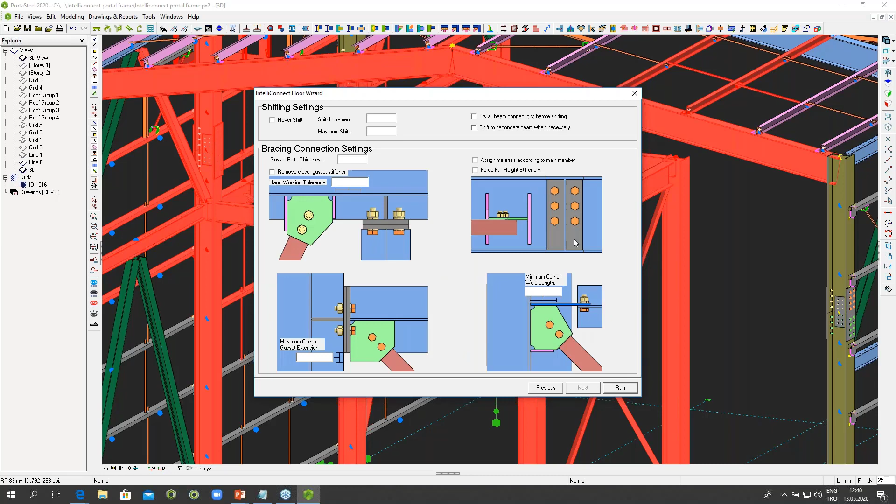Now let's come to some of the very difficult connections, which are really a huge problem. Let's go in there, and I want to zoom in so that you can see some of the stuff. Hopefully, yeah, maybe you can see it. I'm just going to select this part of the building and do the floor beams. And the reason why I've zoomed in is because I want to show you a feature which is important. I'm going to do the floor beams, and I'm going to say use the stiffened end plate connection for the beams. And for the horizontal braces, I want to use the corner bolted gusset or the bolted gusset, depending on what it can. Or let's use the bolted gusset first, and then the corner bolted gusset. Let's use it the other way around. Yeah. And these are some details that I want now.

But what I want to show you, I'm just going to take this window to the side a bit, and I want you to focus on this part of the screen. And hopefully, if you really strain your eyes, you can see some of the horizontal braces moving, because what's going to happen is it will not be able to connect them directly. It will connect the beam, and then when it connects the horizontal bracing, there'll be a clash. So in some cases, it will need to move the horizontal braces a bit, to shift them a bit, and that's what no other program does at the moment.

So I'm just pressing run. Now just focus on the screen, and hopefully you will see some motion. I know it's difficult to see with the low resolution you might be getting, but you can see some of the stuff moving around. I can see it, but I hope you can see it as well. But those are the horizontal braces which are moving. It's trying to move and trying to create a connection which doesn't clash with the other

connection. And that's a huge feature, because I've spent a lot of time in my youth working with steel detailing, and I know from personal experience that connecting these floors is a breeze when you have no horizontal bracing. But once you have horizontal bracing, it takes a lot of time, because each angle of approach and each brace's situation is different, and you have to decide whether it's possible to shift or not, and how much you need to shift. And getting all that done by the program is something which is amazing.

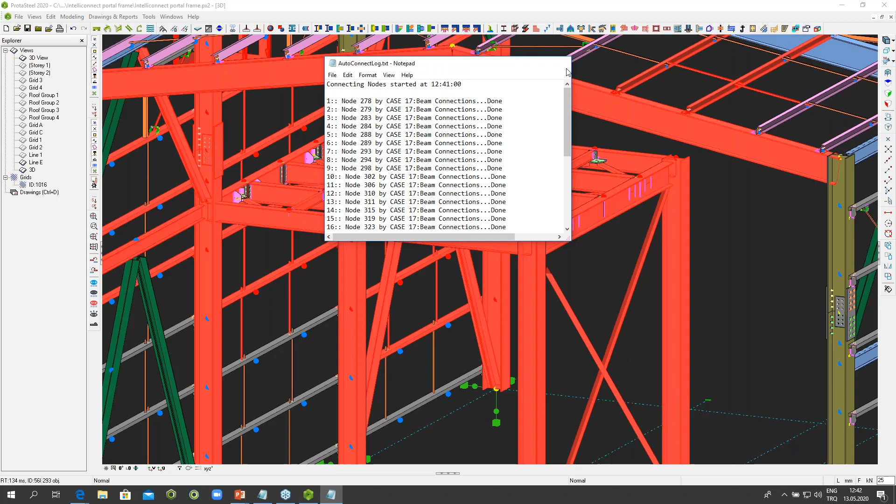So if I zoom in over there, you can see it has shifted this because it was clashing with the stiffened end plate over there. And this kind of versatility and this kind of intelligence is extremely useful, because it will save you days at times. Even when you're dealing with a small floor, it'll save you a lot of hours. Now I want to show you the final part of the connection, which is the column node, which I talked about.

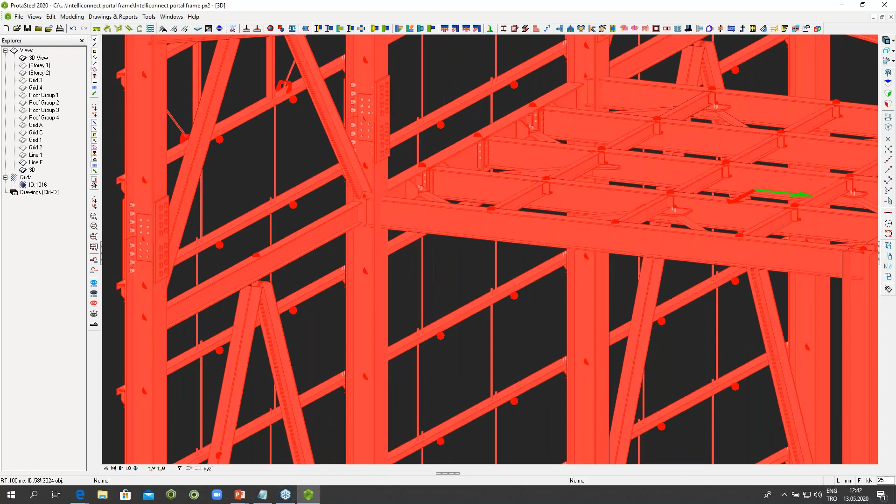Which, if you remember, I talked about this particular point, which is a column with the beam coming in from the fixed side and two beams coming in from the hinged side, and a vertical bracing coming in as well. Those are the really difficult prospects. In fact, I don't have much time, so instead of doing the whole building, I just want to show you, I'll just do it over here.

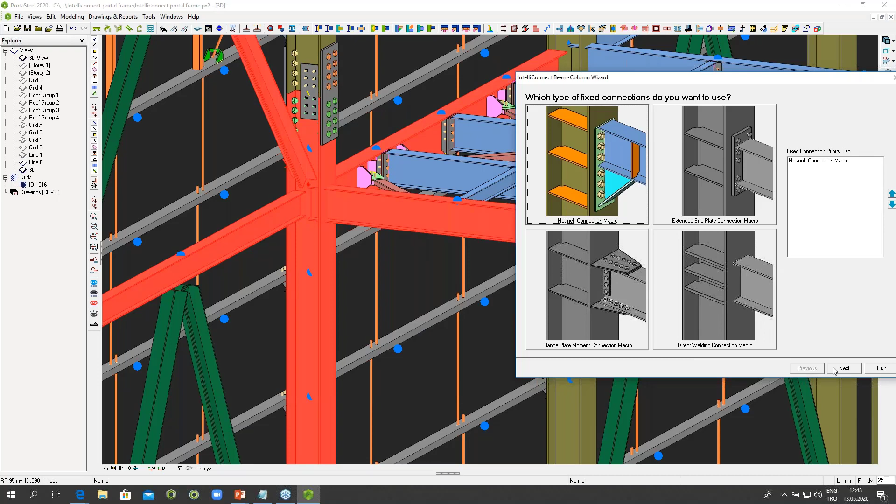Select this area over here and right click and say Intelli-Connect and do the column beam connection. And I tell it to use the haunch connection for the fixed side, and I tell it to use the stiffened end plate from the hinged side. And the vertical bracing is going to be done by the corner bolted gusset automatically. And I just tell it to connect.

Now, as you can see, it has automatically created the haunch. It's created the haunch with the middle stiffener as well, because it knows it's going to need the middle stiffener for the other side. So it's created the haunch, it's created the middle stiffener, and let's rotate, and it's created this stiffened end plate connection. It's created the other stiffened end plate connection from the other side, and it has also used the top stiffener as a corner limiting object for the vertical brace.

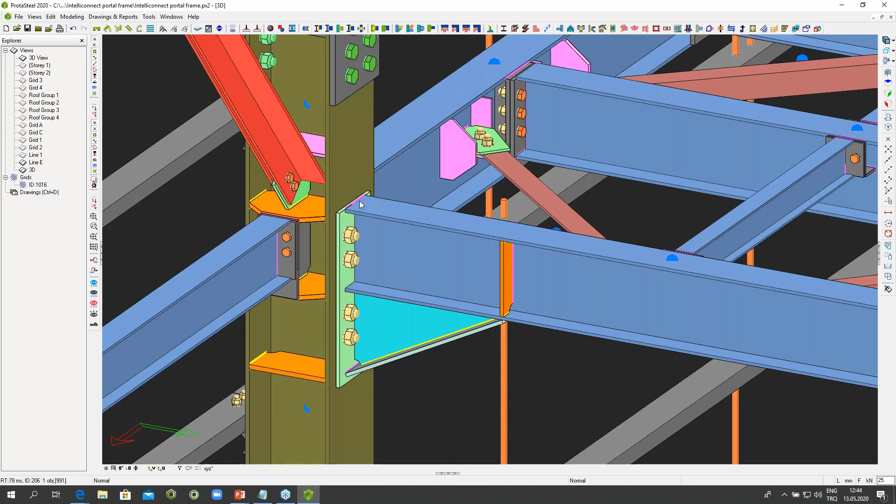Now this is a very complicated point, and I need to emphasize this as much as I can, because those who have done steel detailing will know that these kinds of joints are very difficult to model. But with Intelli-Connect technology, and even without it, like I showed you manually as well, you can do these things manually. But I know there's a learning curve, and I know some people will be terrified of that. So I'm just telling you that with the Intelli-Connect feature, the learning curve is shortened immensely in many ways. And that's what I wanted to show you with the Intelli-Connect feature.

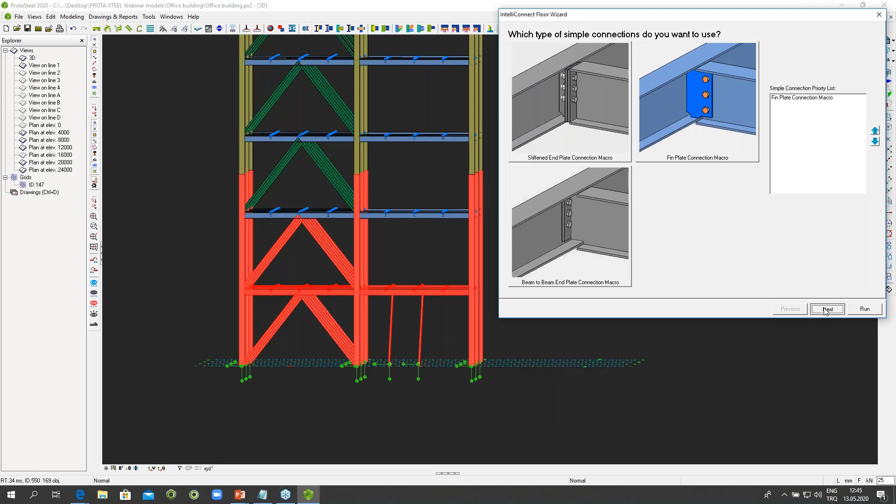Now, let me just quickly go to another short thing, and then we move on. This is a little building which I just made, and I'm just going to choose the first floor over there, and I'm going to say make the floor beam connections, and I'm going to use the fin plate connection, and I'm going to use the corner bolted gusset connection with the fin plate, or if not possible, then the bolted gusset connection. And I just tell it to run for the first floor only.

Now, the reason why I'm showing this to you is because I want to then show you another feature, which is the copying feature. Once you're satisfied with a particular floor, and if other floors are similar, the same, or even slightly different, you can make a floor and then copy it to the other floors, and it will automatically find which parts of the floor match and which don't, and it will connect those which match and leave those which don't. And this will basically save you a lot, because 100% similarity is not required. It doesn't need to be exactly the same. It will automatically go and find similar situations on the other floors.

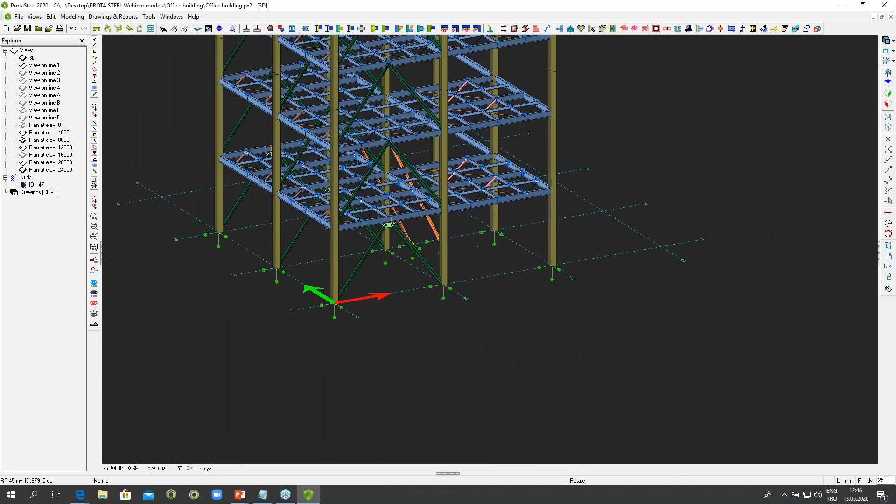So let's just quickly see what I'm talking about over here. I just connected this floor using Intelli-Connect. Let me just open up the visibility of the plates and bolts and macro symbols so that they're visible. Yeah, there you go. So the floor has been connected, as you can see. But now what I want to do is quickly move to the side over here and select this area, select the macros.

There are 135 connections, and I want to just try to copy them up to the next floor. So I say copy, and there's a distance of about 4,000, about 4 meters from here to here, and the other floor could have been a bit different, but I'm just telling it to copy. Let's say copy, and it will go and find whether you have exactly the same situation in the new floor as well or not. And if you do, it will copy the connection to that point as well.

There you go. As simple as that. And we have the second floor completed as well. So that was just one feature I wanted to talk about because I think it's important. And now I want to move on to something else, which is the connection details.

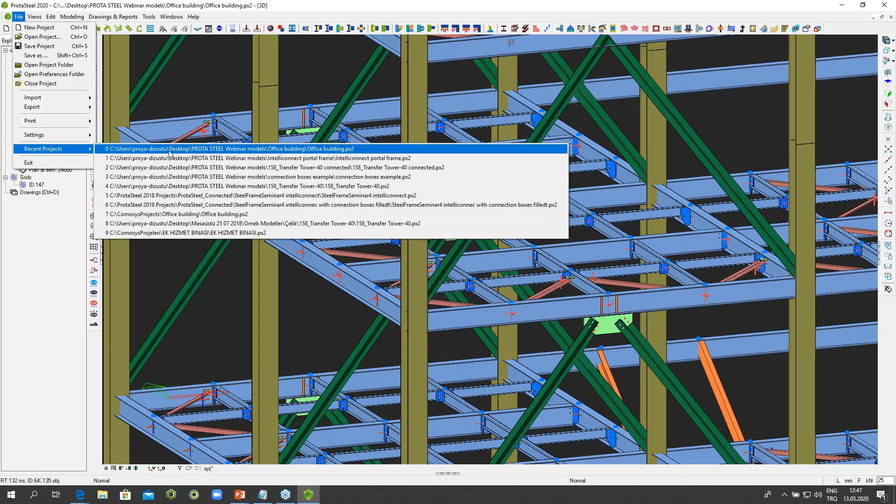Yeah. So most of the companies which are consulting companies need this feature primarily, not the fabricators. What they need is they're producing connection drawings. So as they're connecting a particular joint, they want to produce a drawing of that joint and then pass it on to the fabricator so that the fabricator can then do the rest of the model and produce the shop drawings.

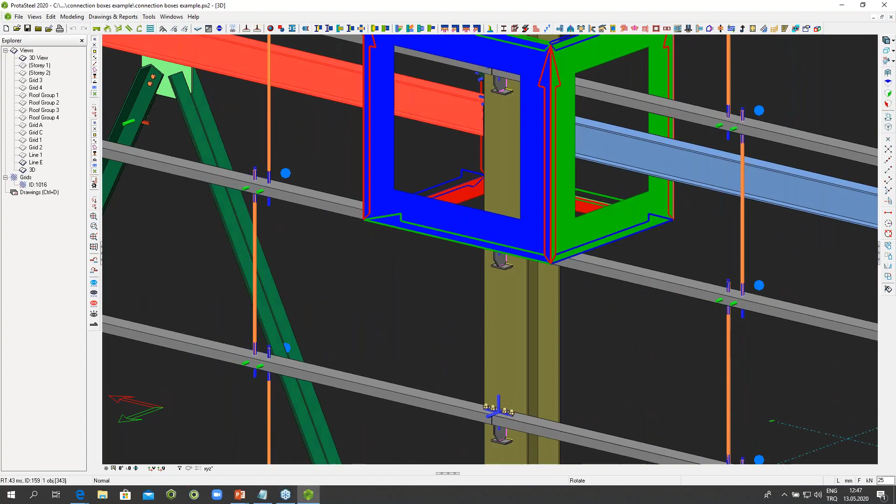So they produce a base plate, for example, a splice, or a column joint where you have some stiffened end plate and vertical bracing connections. These are some of the connections I've done as an example. So what we have in ProtaSteel, what I want to talk about today, are these little boxes you see on the screen. See this box on the screen? This one, this one, this one.

These boxes are intelligent, and when you go to the drawing, they will appear as details. You can limit the scope, you can limit the size. So for example, all these boxes have the red, the green and the blue, right? There's the red, there's the green, and there's the blue. It's like the RGB system. Red gives you the X direction, green gives you the Y direction, and blue gives you the Z direction.

You can view any part of the model from these three directions, and from any general direction as well. That's separate, and you can view them from both sides. So you can view from the positive X direction and from the negative X direction if you want. This is the negative X direction. You can view from the positive Y direction, and from the negative Y direction as well, or from the positive Z direction, or from both sides. That's completely up to you. And once you decide how you want to view it, you can even add a 3D view to it.

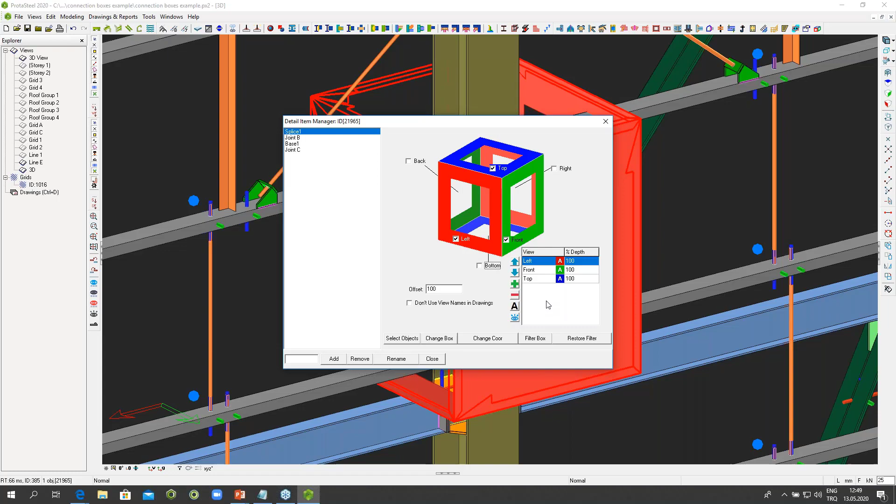And then this box which you've created, once you produce the drawing of this facade, for example, see these boxes detailed out on the side. And this is what we're going to be talking about today. So the creation of these boxes is extremely easy. Let me just quickly go through one of them. Let me just make another one so that I do it from scratch, and then that'll become easily understandable.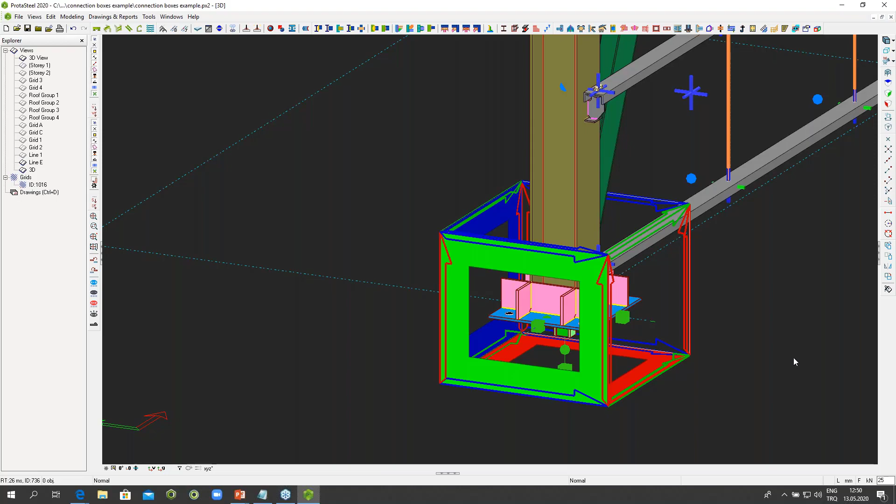And then I say select objects, and now I add the column, which is going to be the secondary member. It's a main member, but for the connection, it's a secondary member. And I press right click, and the moment I press right click, a box is created. And now this box can be used. I can make this box bigger, I can make it smaller. I can add more elements to it. I can add viewing directions. I can add a 3D view. But it's as simple as that. I did it in like half a minute. So you can create as many boxes as you want.

And once you're done with the boxes, you can just go to the drawing side, which I'll do in a minute, and create these drawings. So let me go to the drawing side and let me show you. First of all, let me show you a 3D view of the building, which might take a bit because it's fully detailed, but it shouldn't be that long.

Yeah, there you go. So over here you see this is a full hidden line view with the bolts and the welds. You can create these views. You can make them part of your reports. If you're producing shop drawings, fabrication drawings or general arrangement drawings, then these will obviously be needed. But now let me take you to the other drawing which I promised, which is the one related to the boxes.

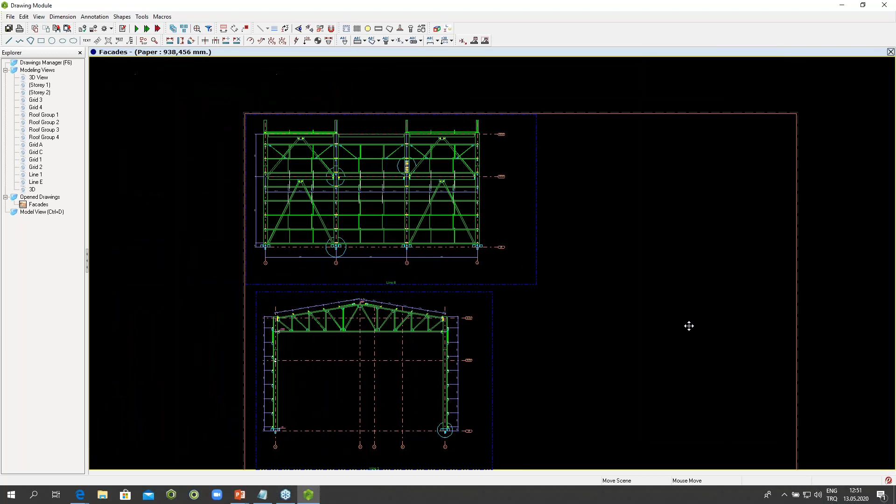So here I've done something. This is the facade I was showing you, and as you can see, first let me see all the connections are here. The girt connections, the bracing connections. Here you see the truss connections. You can give the dimensions. You can give the levels. The girts have been dimensioned as well.

But what I want to show you right now is these three circles. This circle and this circle and this circle over here. These three circles came from those boxes. They haven't been labeled yet. I'll show you a command in a second. Any box which enters into this drawing will come up as a circle. It won't come up as a box. It'll come up as a circle.

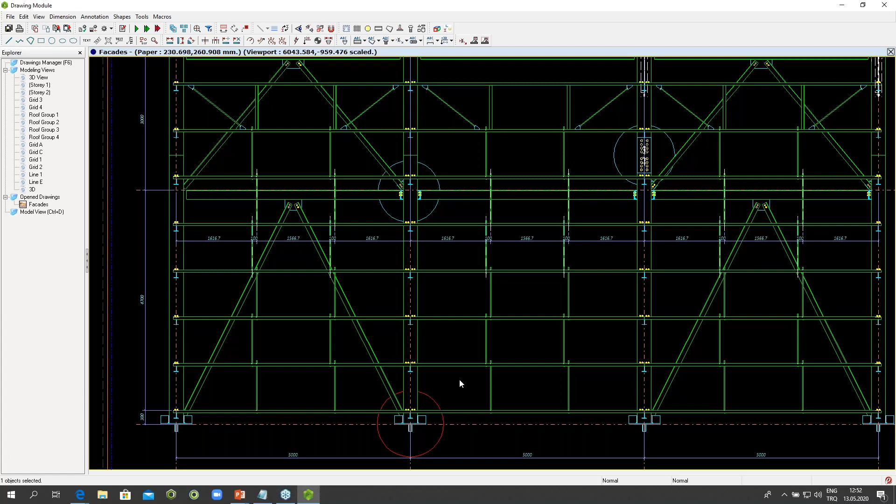And then once they're there, all you need to do is go to this same tool on this side, load the default settings, and just press the button. In a few seconds, the boxes which I showed you over there are created, and you can see all the main members, all the bolts, all the welds have been annotated from the views which I wanted. So I told it which view I wanted: the front view, the back view, the left view, the right view, whatever 3D view, and they're all annotated over here.

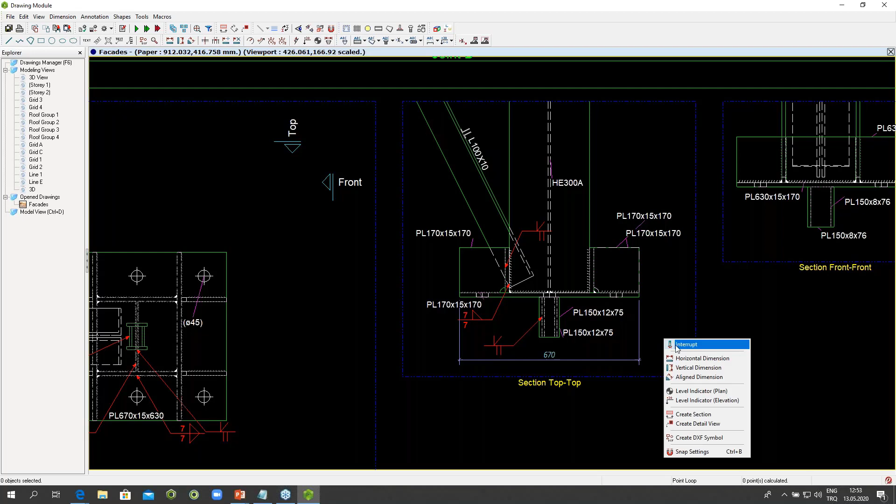So this is maybe about 70–80% of your connection. Maybe you need to add a few dimensions. The only thing it doesn't do at this point is add the dimensions. It does give you the thicknesses of the plates. It does give you the size and the number of the bolts. But if you want to add a dimension, you'll need to add that manually at this point, and we're working on it, and hopefully we will get some sort of feature on that later on. But the annotations, the elements themselves, and the views will come from the program automatically.

So this will be a huge feature, hopefully, for the consulting companies, because all you need to do now is just quickly finish your work in ProtaStructure, transfer the model to ProtaSteel, and go ahead with the detailing. As you just saw, it's a breeze. You basically just click on everything. If you find that difficult, you use Intelli-Connect whenever you can, and you finish the modeling. Once the modeling is finished, you create these little boxes around whatever locations you want to highlight to the fabricator, produce the general arrangement drawings, and these little boxes turn into details.

This is extremely useful, and I'll move on from here. What I want to show you now, very quickly because I want to leave a few minutes for questions, is the production of shop drawings. Now, the consulting companies might think they are not in the business of producing shop drawings, but they can be. It's not forbidden, and they can make money out of it, because the client is going to pay the fabricator, and the fabricator is going to charge the client, but you already have the model.

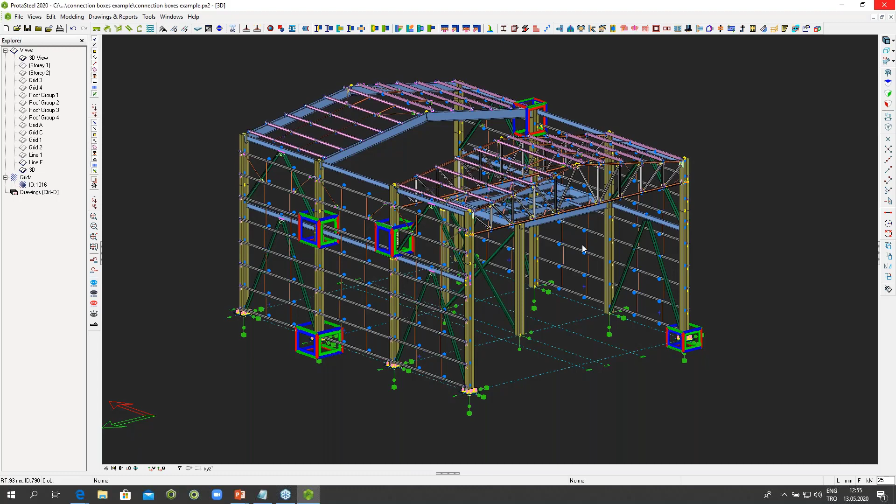The consultancy company already has the detailed model. Just like I showed you, they have Intelli-Connect now, so they can quickly build it and then produce the shop drawings. Are the shop drawings just as easy to produce? Yes. You don't produce them manually. The shop drawings are produced completely automatically. You select a truss, for example, right click, say create drawing, and create the assembly drawing. That's as simple as that.

Or you can select the whole building, right click and say create drawings, assembly drawings. There you go. All your trusses, beams, purlins, girts, columns will be modeled and connected. Let me just show you something over here before I continue. Maybe I can show you this column over here. If I highlight the assembly and show only that, yeah. So this is a column.

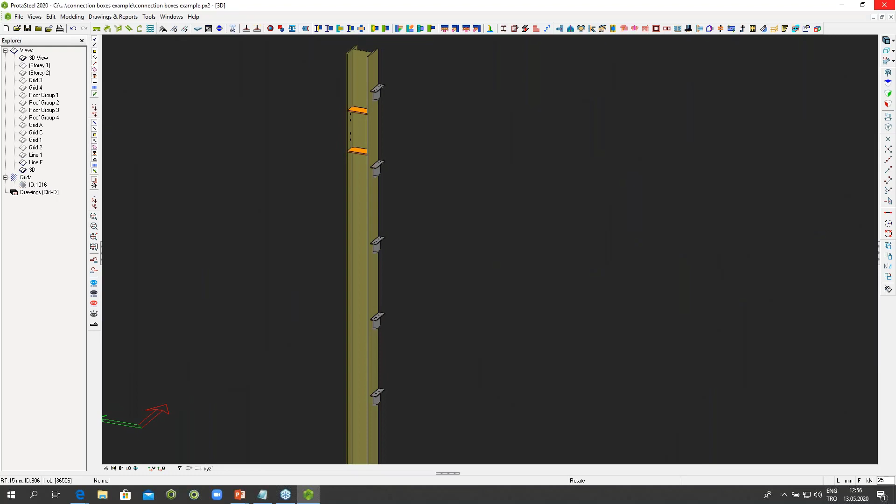This is the column fabricated, and I can produce the shop drawing of this column directly on the go over here. You can view it on the screen just to see if anything is missing, and that's a very quick way. But now I want to just take you to the shop drawing feature. So like I said, all you need to do is just select, right click, and say produce the drawings, and it will be as simple as that.

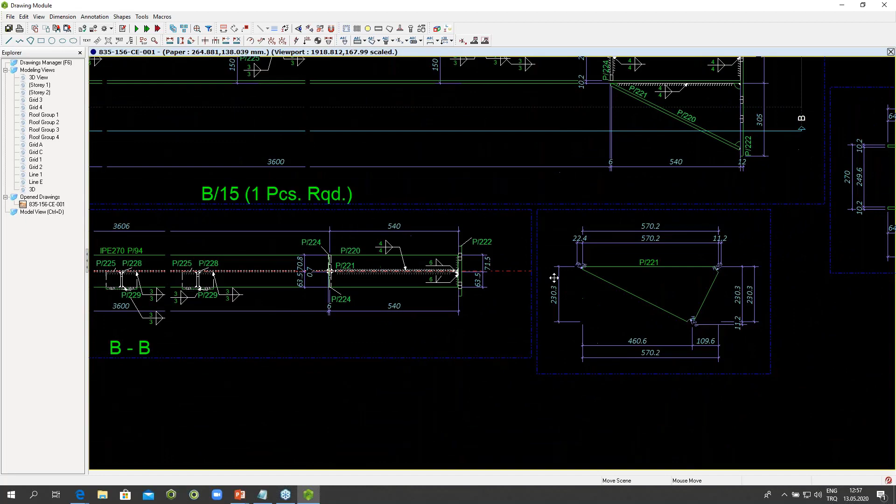I don't want to waste too much time on that, so I'm just going to go and open the existing one. So let's see. This is the drawing of the beam with the haunch, I think. Yeah, there you go. So if you zoom in, you can see we have the fully detailed haunch beam drawing with the stiffened end plate connections on both sides. It's fully dimensioned. There's no dimensioning needed. All the single parts are also added.

Obviously, this is optional. You can have the single parts in there, or you can have them separately as A4 sheets. You have your material lists. These are all customizable, by the way. Not necessarily what you get. You can customize these things, and they're pretty customizable. And you can change the dimension properties. You can change the colors. You can change the sizes. You can decide whether you want to show the welds or not. The scales, and it's a very comprehensive tool with which you can produce your shop drawings.

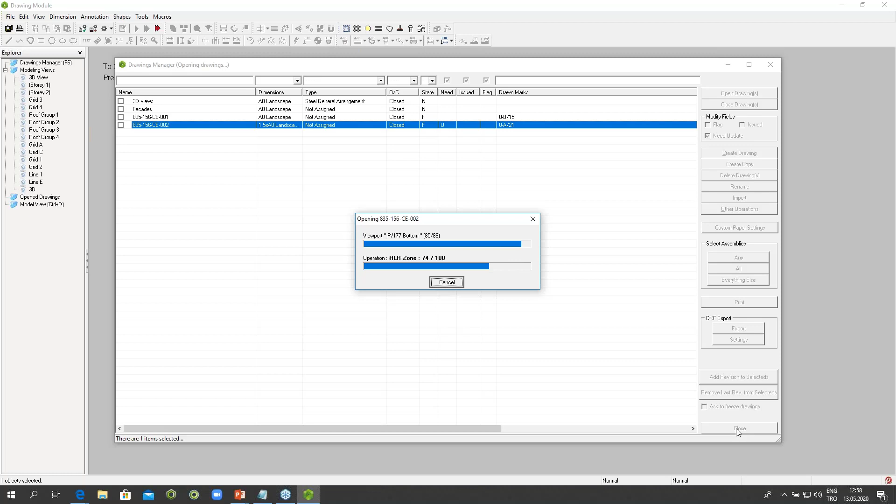Let me show you an even more difficult one, something which most programs find almost impossible to deal with, and they are trusses. If you've worked with trusses in other programs, you will have noticed that detailing the truss, creating the assembly drawing of a truss is one of the most difficult. It has to be almost completely redone by hand, because what the program gives you is basically a mess.

But over here, this is the truss which we modeled over there. Just look at this. Just look at this detailing over there. It's extremely accurate. It's extremely useful. This can be used directly in hundreds of projects in Turkey. You just send this to the fabricator, and they just produce the steel. So this is another feature which I wanted to talk about. And like I said, the part drawings are also producible. The assembly drawings are also producible. The general arrangement drawings are also producible.

And once you're through the learning curve, which is hopefully not much, and we can help you with that. We can help you with the training if need be. But once you're through with that, you should have a tool in your hands which is going to reduce your man hours by hopefully several fold. So what you did in a month, you could probably do in 10 days, hopefully. And that's a lot to say for a tool like this.

Now, obviously, I could not go over a lot of features. It's a very powerful program, the very best. And while what I've showed you is simple, in reality, it can handle some of the most complex of situations. Because what I haven't shown you is the manual detailing feature, with which you can completely detail your structure entirely by hand as well. You can create the most complicated connection, and you're not limited to the macros. The macros will help you do it extremely fast. The Intelli-Connect feature will help you do it extremely fast.

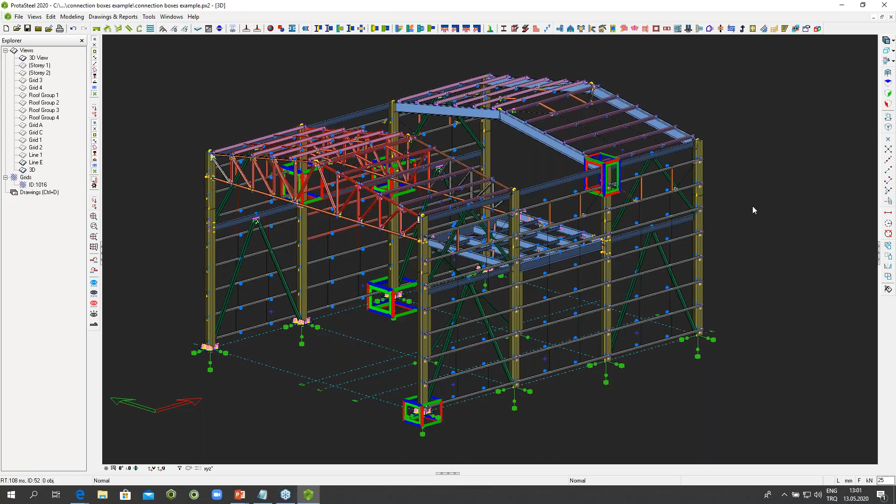There's a fully functional CAD package, which I didn't mention, but you don't need to use AutoCAD with this. You can produce the entire drawings within it. So let me just finish the live demonstration over here, and let's continue with the webinar. So ProtaSteel, what I showed you was Intelli-Connect, the wide range of simple moment, splice and welded connections. Consider constructability, adjusts connection arrangements to suit Intelli-Connect, which as I showed you, the moving horizontal braces, all the additional ancillary steel work. I showed you the handrails and the floors and those kinds of things.

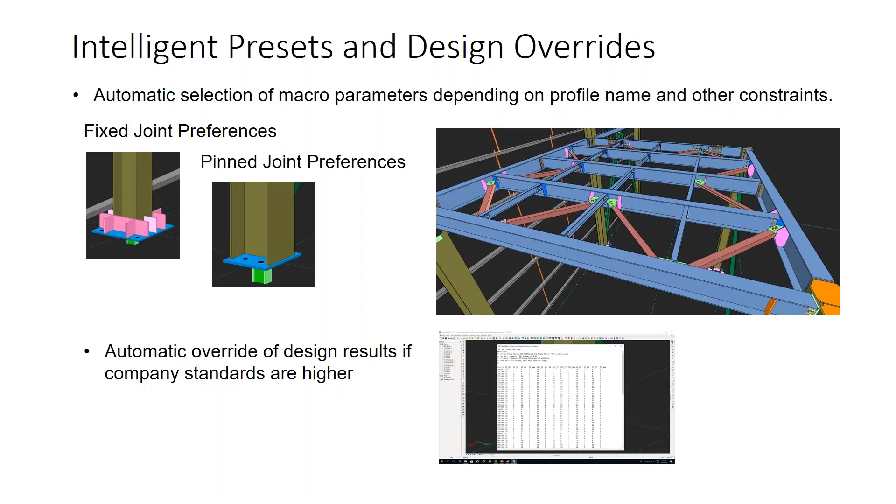Intelligent presets, I didn't talk about them much because of lack of time, but basically, once you set up your company standards, you can just click away to infinity. In most cases, you will not need to come back and enter much in your macros, and you should be doing that. The intelligent presets. Automated design reports I talked about, the greens and the yellows and the reds.

Like I said, right now we have all the floor beam connections, all the beam to column simple connections, all the beam to column fixed connections, the base plates, the vertical bracing, horizontal bracing, bolted connections, the truss connections, the splices. So basically everything is in there except for some minor sag rod connections which you don't want anyways. But connection needs are already in there. So you will save a lot of money and time, obviously, by using ProtaSteel.

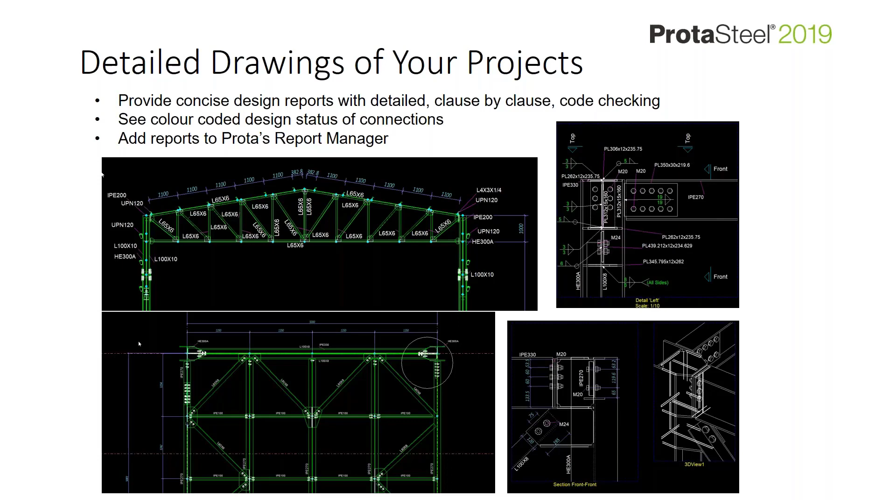You can produce detailed drawings of your projects. I just showed you those, the general arrangement drawings, the connection drawings. Those are extremely useful. You can create fabrication details, I just showed you as well. And you can produce NC data as well. So that is a lot.

And once you're done with it, it doesn't stay with you. You can share your model with other people. You can share it through IFC. You can share it through the Tekla exchange format we have. You can share it with Allplan, etc. Basically anything which works with an IFC. ProtaSteel works with IFC, so there you go. So that's what I wanted to say.

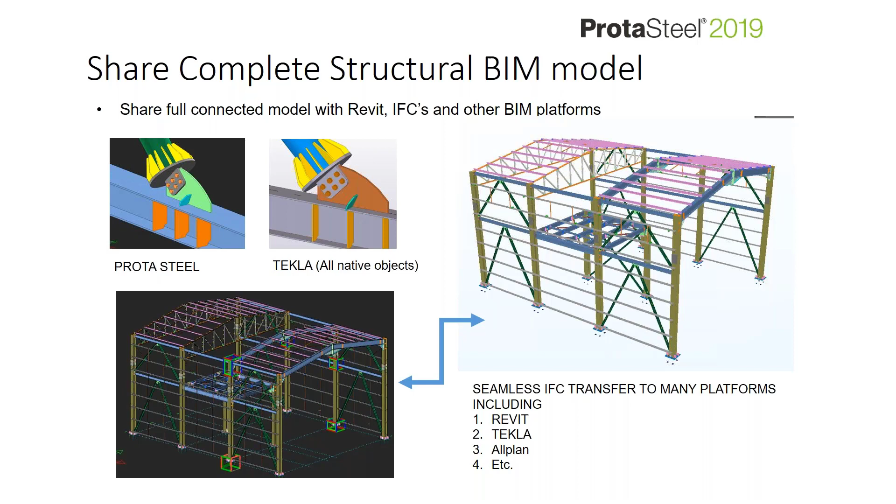And the Prota advantage, exceptional value. If I just want to summarize the Prota advantages, if you see other solutions, they're all over the place in the sense that first of all, they're selling everything separately. So even if they have this tool, you're going to pay extra for it. But as far as building design, drawing management, a full DWG drafting capability, component design, full RC quantities and schedules are concerned, automatic steel connection design, steel detailing, shop drawings and quantities, which we talked about today, and collaboration with BIM, everything in one package.

That's something you will not find elsewhere, and that's something which we want to emphasize, because it's not only going to save you time. It's also going to save you money because you'll not be paying for a million different softwares. Everything will be included in the ProtaStructure suite. So we hope you liked what we covered today.